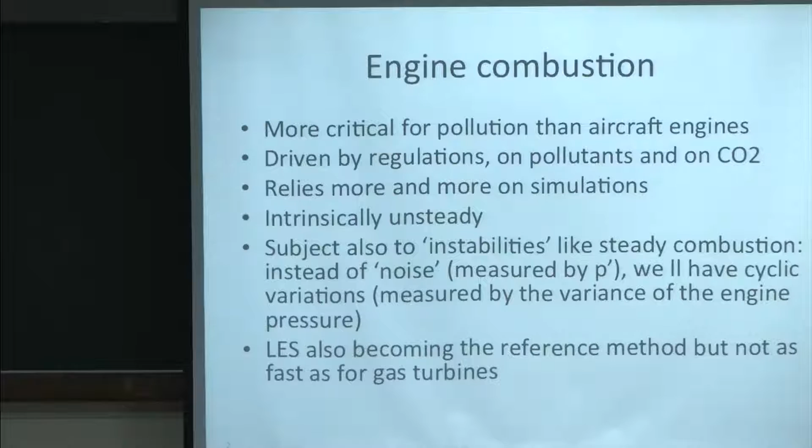Now, in this field for piston engines, LES is becoming also the reference method, but it takes more time than in gas turbines, just because the technical problems of piston engine simulations are more difficult.

So I will focus today on direct injection engines, on instabilities, and I will describe recent LES results to show you how we do these things in France.

Basically, the message here is that if you want to do LES for piston engines, the first thing you need to do is to build a special experiment. You want to validate the LES. To do that, you have to talk to the people doing the experiment and ask them to do the engine you want, because the engines they do cannot be used to validate LES.

So, direct injection engine, that's the general context. You've seen already what that is. Instead of injecting the fuel upstream of the valves here, we inject it directly into the chamber. And that's a great thing to do because you don't have to burn in a fully premix mode. You can save fuel, but at the same time, of course, it raises all kinds of interesting questions.

The idea is to go to lean combustion, and the idea also is to stratify the charge, which leads to a very different type of flames here. So it's good for many things, but it's also bad because you cannot work only with stratified flames, and you also need to be careful because you start making soot, because if it's not premixed, you start having very rich zones which will make soot, and the whole flow field becomes very important.

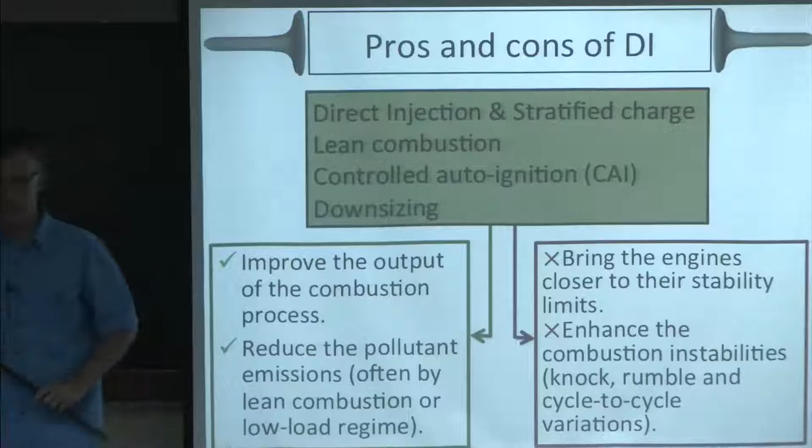I will just show you a picture later, but as you know, among all the unpleasant things which may happen in an engine, where cycles are different, is that one cycle from time to time might start to knock. And if you have knocking in an engine, that's absolutely a bad idea.

So we have seen that steady combustors like gas turbines can exhibit instabilities. It's the same thing for a piston engine. The difference is that in a gas turbine, what we see is that the flow will oscillate in time, and in a piston engine, what we'll see is that cycles will be different.

So, of course, the worst case in an engine is to have a cycle which burns and the next one does not. And I will show you many examples today where this happens. And then, of course, you imagine that if one cycle does not burn, you release all the fuel to the exhaust, and that's not going to help in terms of pollution.

So images of cycle-to-cycle variations, those are, for the moment, experiments. The spark is here. Those are 4 different cycles at the same crank angle, and you see that they are different. This means also that this is the curve we're going to use in most cases here.

This is the pressure curve. In an engine, the pressure curve goes up like this. And if the engine is not fired, it comes back to this. If the engine is fired, you produce work, and that's what you use to push the car. If you plot many cycles on the same thing, you have here the maximum, the most efficient cycle. Here you have the cycle which burns at the minimum level, and all the other cycles are here.

What you do, you compute the work produced by the engine, which is called the IMEP here. And the IMEP, you can take the variance of this quantity, which measures the spreading of this curve. This is what we'll measure to define what an engine is in terms of stability. So if this thing is less than 2%, that means really the integral of this curve.

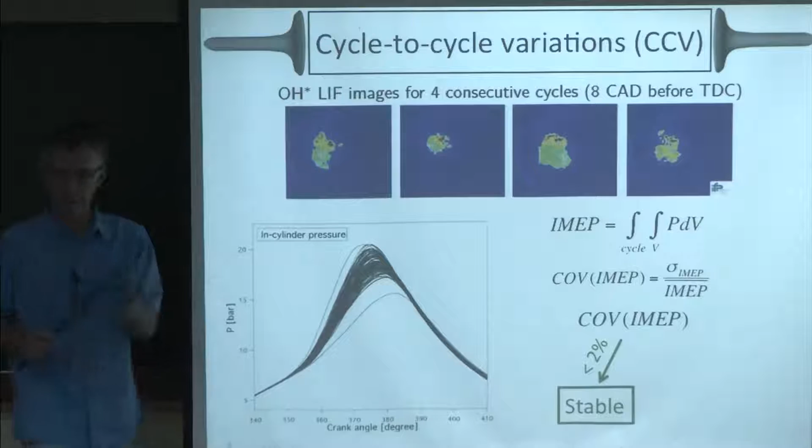If it's less than 2%, you say your engine is stable. And if you have typically more than 2%, you say the engine is unstable. So the engine that you have in your car today has probably a limited level of CCV, less than 2%. Otherwise, you would not find it on the market, because when an engine is unstable, it's very difficult actually to drive it.

It becomes a problem. And that's why actually many good concepts of engines do not make it on the road, because they are too unstable. It's exactly like gas turbines. You have a great gas turbine, but it's oscillating. You cannot do anything with it.

Another image of an experiment showing also that certain cycles might be burning very fast while other cycles are not. Even the things you see, and I'll come back to that today many times, you see that what happens quite often is that these flames get split. When turbulence is intense, there is no reason for the flame front to remain one ball of flame. Quite often it becomes 2 balls or more. And when it does, each ball now is more sensitive to stretch and may actually quench. That's what's going to lead to problems of variations.

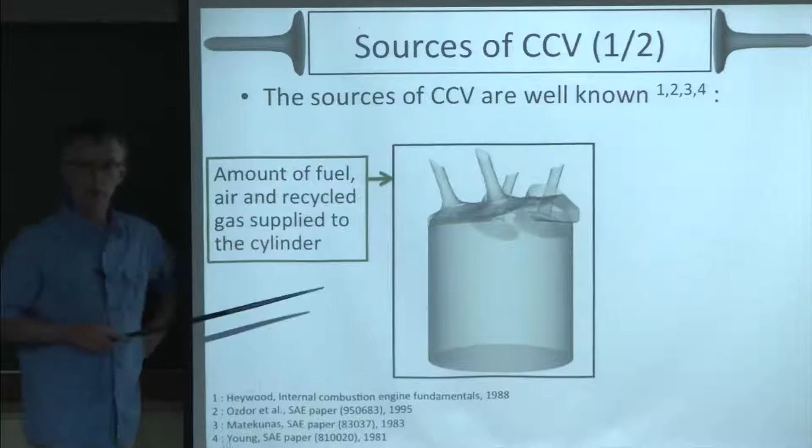This is a turbulent flow. Turbulent flows are chaotic, so maybe for one cycle you have a certain structure, and for the next one you have another structure. And then you can have, at the spark plug itself, which is of course the sensitive point here, you can have a different composition. And if you have a different composition, then of course when you spark it, well, you have a different flame.

There's a last but not negligible problem here, is that the spark itself may not be a process which is fully repetitive. You have to load the electrical circuit, then you get the spark, and from cycle to cycle, this thing may be different. We won't talk about that here because for the experiment, like as for the simulation, we used plugs which were really repetitive.

Now, what causes cycle-to-cycle variations? If you have a stable engine, you want to make it unstable, there are different ways to do that. One of the methods is, for example, to increase the level of recirculating gases that you inject in the engine. So if you start from 0, you have a stable engine with a 2% variation, and then you increase the dilution here by burnt gases in the fresh gas. Then at some point, these things go up, depending on the engine, but that really tells you that here, at 20%, you cannot operate this engine, okay?

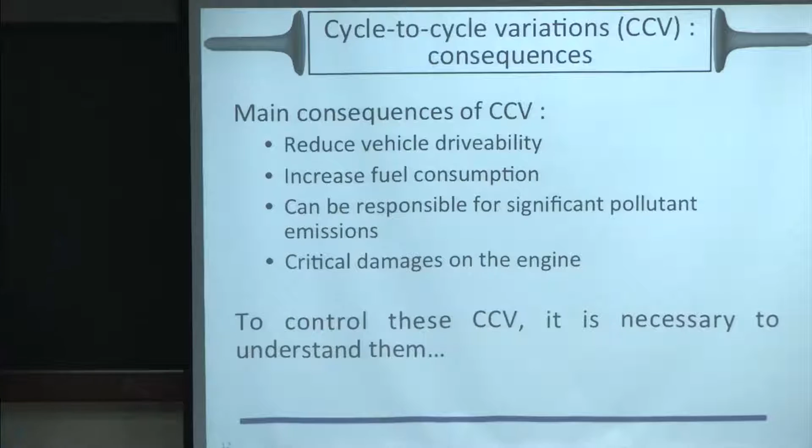To suppress them, you may try to suppress them blindly, or you may try to understand them, which for us, for our community, is of course the best way. For engineers, sometimes if you can fix a problem and make money out of it, it's sufficient. But for scientists, it's not.

So how do you study CCV? Well, we're going to use an experiment which was developed specifically for LES in Paris here at IFP. And we're going to use simulations.

Now in terms of simulation, I don't need to convince you we are not going to do RANS, because RANS cannot do something else than the mean. We are not looking for the mean, we're looking for the perturbations. Even so, certain people like Converge are trying to convince everyone that they can do CCV with RANS. By definition of RANS, it cannot do CCV. It's going to give you the average cycle, that's all.

DNS, of course, you're not going to do that in an engine, so we are left with LES, not much to do. Just a comment here, what we saw during this big project, which lasted 4 years...

The main problem is to make sure that the guys doing the experiment give you the data you want and actually operate the engine that you believe you are operating. In my group, there's a big joke that I've been using all the time. I keep saying if we do 100 simulations, out of these 100, 90 are not computed on the right geometry. And for the 10 which are left, 9 are not computed with the right flow rate.

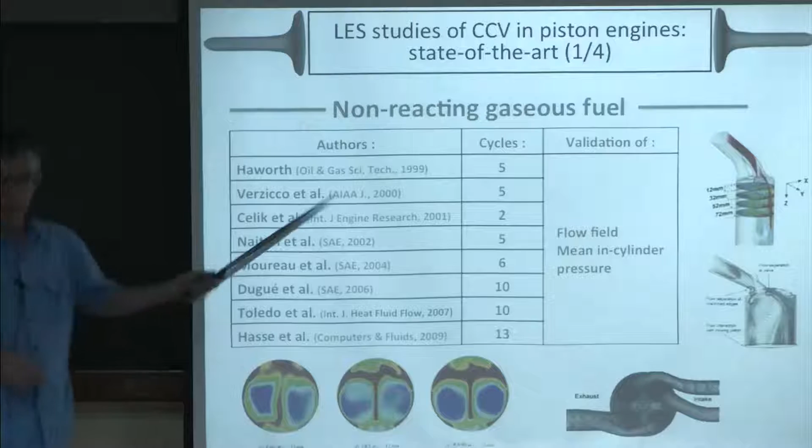So that's for the non-reacting cases. Of course, when you go to reacting cases, in the literature, it's going to be even more limited. That's with two-phase flow, non-reacting, and that's for reacting flows. In the field of reacting flows, when we started this work, there were only ones done on 10 consecutive cycles, because if you want to do that, you must compute the whole cycle: intake, compression, combustion, exhaust. So even that, even in RANS, can be an interesting exercise.

So there's only a few works then which deal with CCV. And in most of these studies, the idea was just to prove that you could do it, but there was no real validation. This is why we started this project, because we wanted to compare with an experiment.

So the experiment was built to do that. It's not as if we take an engine and try to see what it gives, we chose the system. So this is the engine. And the first thing you have to do is make sure that you understand the boundary conditions.

So we forced those guys to remove everything they had, and we told them, we want a plenum here where we know what the pressure is. We want a plenum here at the outlet where we know what the pressure is. We want to know exactly all the geometry here, and we don't want anything fancy. We don't want a filter. We want to know exactly the whole geometry, and we want it premixed.

That was the other point also. Before doing the direct injection, the first exercise was to say, let's make it premixed. So in that case, there is no mixing question. Can we do it? Can you capture what's going on?

As I said this morning, if you do it premixed, we are mixing here the air and the propane, so the whole thing is premixed. So you need to put a flame arrestor, otherwise the experimentalist might hate you. Which means also that we're going to put the flame arrestor in the simulation, so we need to model it. Otherwise, we could not capture what's going on for acoustics, for example.

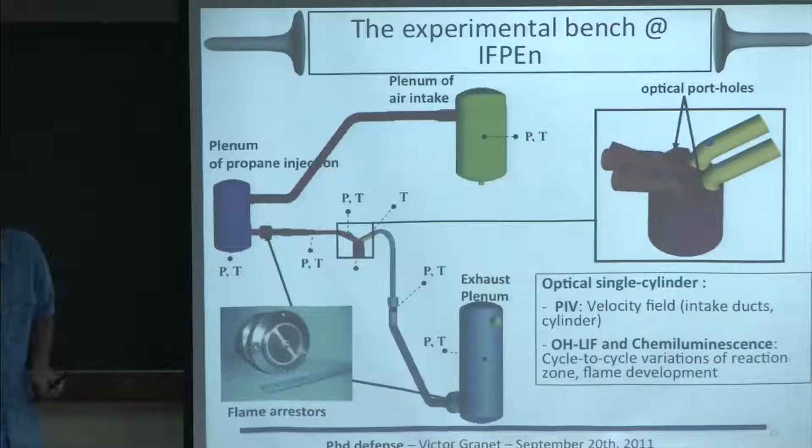Now it's a nice setup because we do have all boundary conditions. So you recognize here the flame arrestor. That's the inlet plenum, that's the outlet plenum, that's the engine. And this is what you need to compute, okay?

So you see here the intake. You recognize it's LES now because you have your eyes adjusted to what I tried to tell you. If it's LES, you must see structures. Now you see structures, okay? If you do the same thing with RANS, it will all be smooth. Next cycle, etc.

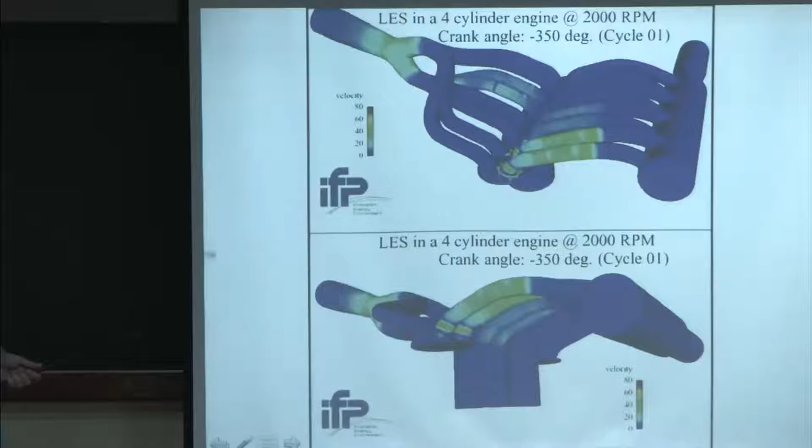Remember that this is not a real engine yet. For example, it's a single cylinder. And of course, we could compute a 4-cylinder. If you want to do a 4-cylinder, you're not going to validate much, because the experimental data will be insufficient. So it's really a problem to find the right equilibrium between a realistic engine and an engine on which you can do good measurements. So we stick to this single cylinder.

So you have an optical window here. This has been described yesterday by Professor Garwal. You have a transparent piston. You can look at the flow from the bottom, and you can do all kinds of diagnostics. Those are the dimensions. This is a 500 cc, I guess, displacement engine.

So I'm going to talk about... there's a huge database which was created for that, but I'm going to talk only about 4 cases. The first one is what we call the motored engine. That means the engine is not fueled. It's just rotating because of an electrical engine. And you can look at the non-reacting flow.

And the rotation will be 1200. And of course, there's no instability there, there's no combustion. Then we'll talk about the reference case. The reference case is what we call stable ref, which means it has a low level of CCV. That will be used as a reference.

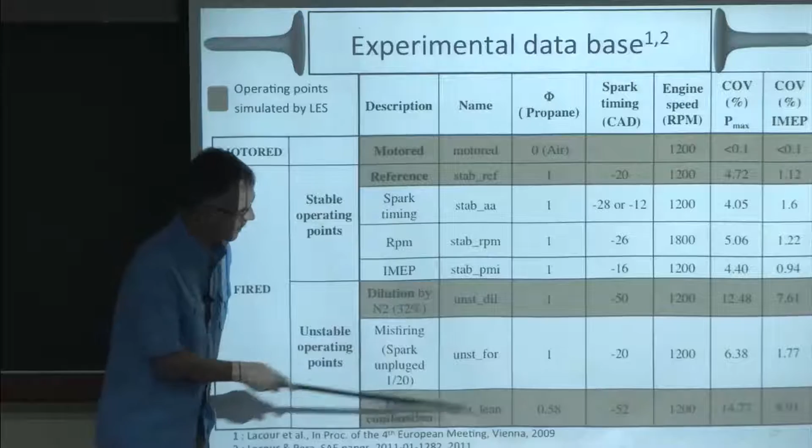And then we'll do a case where we dilute the intake gases by nitrogen. And here, you see that the CCV goes to 8%. So that's an unstable case. And then the last case we'll do is called unstable lean. We'll decrease the equivalence ratio from 1 to 0.58. And then, of course, we'll go to 9% cycle-to-cycle variations.

And the fuel will be propane, so again no problems with atomization. We are not going to be able... it's not an atomization problem because there is no atomization. It's not a problem of mixing because we do premixed. So we limit the number of things which can cause cycle-to-cycle variations.

So let me show you first the setup. I will show then the simulations and go later to the analysis of these things. So LES strategy, you've seen that the objective is really to see what's going on here. But if you want to see what is going on here, you need to compute the whole thing down to a point where you know the boundary conditions.

So that will be this zone here. And of course, we could compute only on a small part of the engine. That would be easier. But then the boundary condition will be very difficult. So when we do the whole thing, for boundary condition, it's clear: we go to a place where pressure is imposed. Pressure is imposed, simple.

The problem, of course, is that you need to model everything, and you need to add the flame arresters because they are there. So initially, we didn't put them in, and we saw that that was not working. The code is always the same—it's the same code we use for gas turbines.

It's just that it can handle moving mesh. That's the only difference. Just a comment about piston engine codes: they are a little bit different from gas turbines because when we compute one cycle, we basically interpolate between phases.

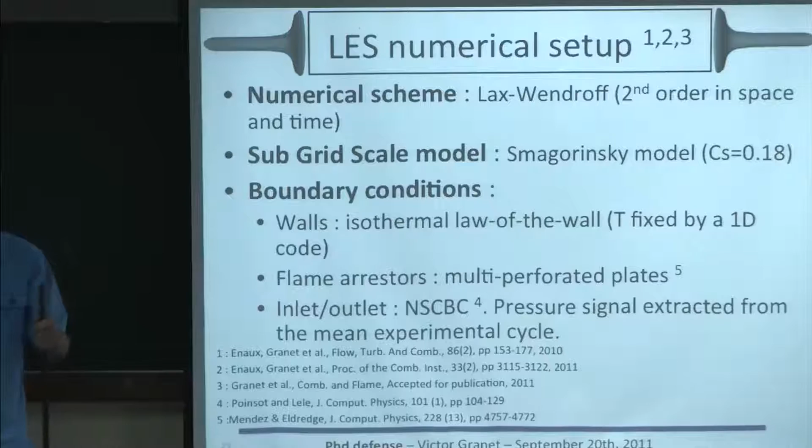This is the good thing about teaching for 30 hours. Now you should know most of the things I'm referring to.

So this is the mesh. The first thing you do in this system is to do what we call a mesh-only run, just to visualize the mesh and see how it's moving.

So the mesh is actually deforming, and as I said, maybe you can see it, though I'm not sure you have the resolution to see it from where you are. The mesh is changing from time to time. You can see small jumps. This is every time we have an interpolation, then the mesh changes a little bit, and there are about 40 moments in one cycle where we change the mesh.

One of the big problems, of course, is how you handle the opening and closing moments of those valves. When you open some of these valves, normally you have a shock because the pressure ratio is more than 2, so you get a small shock over 2 or 3 points. So there are dirty details here that most companies won't tell you, but you have to do things which are not especially nice to have the code handle.

There's a new thing also compared to gas turbines: now at every cycle you need to ignite. You smear it out, saying it's not going to last long, so I just put artificial viscosity and I wait until the pressure goes down.

Yeah, approximately constant.

Well, we add points, okay? That's the interest of interpolation. When we go to bottom dead center, then we have much more points than at top dead center, because as I said, 40 times per cycle we change the grid. We stop the computation, we take the result, and we go to a new mesh. We do that 40 times per cycle, yeah.

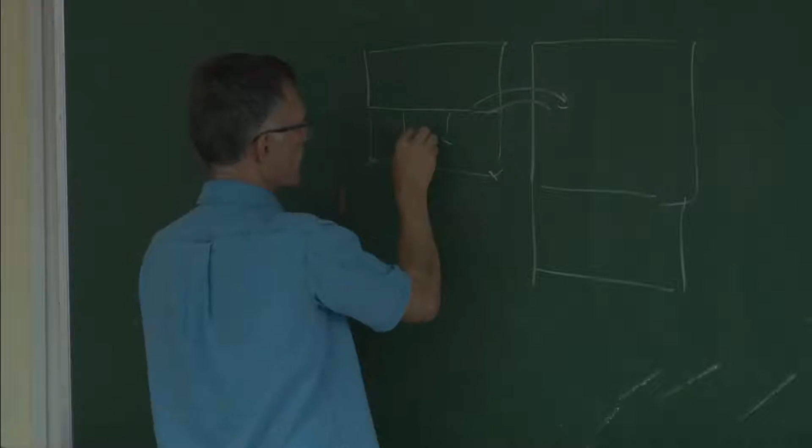So you create all the meshes: the initial mesh and the final mesh every time. And then you interpolate, you stretch the mesh in between. The whole procedure used to take about 5 months.

Yeah, well, the new mesh is always cleaner. After you pull it a little bit, it gets less clean, and that's when you decide to change. Every time a mesh gets a little bit too distorted.

The remeshing is automatic, that's not a problem. We do a high order interpolation. That works well.

Well, we use exactly the same thing, IFP has a RANS code. This is the same procedure they use for the RANS code. There's no difference.

So you said the pressure signal is averaged and imposed at the inlet. Usually in combustion engines, the intake manifold pressure itself varies very drastically, which can cause many changes. Sure, the intake pressure here fluctuates, but we compute the plenum up to this point, and at this point the pressure doesn't change. It's the same for the outlet. That's why we wanted these big plenums. Otherwise, if you only did it here, the intake pressure would be fluctuating, which is painful.

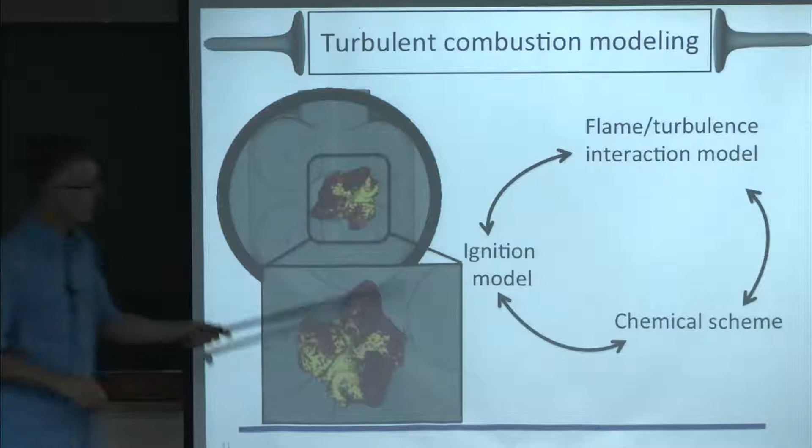The additional problem here compared to a gas turbine is that we need to ignite at every cycle. In a gas turbine, you ignite, then forget the initial conditions, so you don't really care about the details of the ignition. In a piston engine, you have to care because it's going to play a big role. The other thing which is different is the chemical scheme - for gas turbines we didn't have to worry about that. For this problem, things are a little bit more complicated.

So spark ignition, I will talk about it tomorrow - it's extremely complicated. Describing the initial plasma phase and all that is a very tough job. So for a problem like this, what most people do is neglect the plasma phase and say, okay, we can have 40,000 K for a few nanoseconds. I begin after that. What's important for me for the flame is that this thing is releasing a given amount of energy over a certain amount of time.

Why is it not important for a gas turbine to see how the spark propagates? Well, in a gas turbine, if you're looking at steady state, you don't care how it was ignited, because you ignite it only once - you could use anything to ignite it. Here you ignite it at every cycle, so if you have a wrong ignition procedure, it's going to contaminate the whole simulation. Now, of course, some people in the gas turbine community are specialists of ignition, and they have the same problem - they have to model the igniter.

So what we do here is use a model called the ED model, which was published a few years ago. The ED model basically gives you a Gaussian in space and time, an energy deposition at time t0 over a sphere of radius sigma r. The total energy deposited is epsilon I. So if you know the energy, this produces an energy deposition in the equations that increases the temperature, and then the combustion model takes over. Which is, of course, not what a spark is actually doing, but I will talk about it tomorrow - it's a different topic.

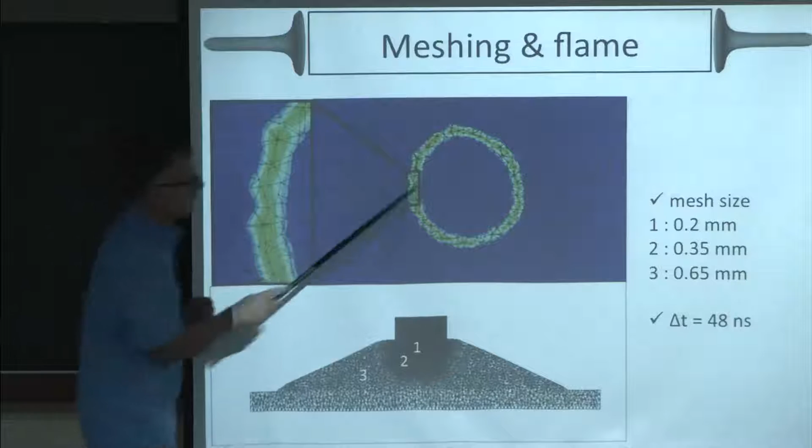So the spark in this engine is located here, and we refine the mesh in this zone, because that's where the gradients will be very strong. This is a zoom on that zone. You can see the flame is resolved over 1, 2, 3 points, which is really the minimum you can have - below that would be difficult. This is where we deposit the energy, and after a while you see this kind of flame starting and getting wrinkled.

So this is a pragmatic approach. It does not take into account the physics of the plasma, and we cannot predict cycle-to-cycle variations due to the plasma phase - obviously this is not in our capacities. It also does not take into account the fact that the electrical circuit itself might not be perfectly repeatable.

Now, chemistry. I said in the gas turbines part that the nice thing about chemistry in a gas turbine is that it's at one pressure, one inlet temperature, and one equivalence ratio. Now everything is changing in an engine. The pressure will go up, the temperature will go up, but still you can use a simple scheme.

We use a two-step scheme for propane because we were burning propane, and that's the equilibrium to get the right flame temperature. With these two schemes, if you fit the Arrhenius laws, you can obtain something which works all over the range that you need. So the cost, of course, is going to be much less, and that's important for us.

So let me show you the typical results. A good way to look at an engine like this for chemistry is to plot the temperature or the pressure, because the two go together. Typically in an engine, when you compress the gases, it's an isentropic compression, so temperature and pressure go together. The important thing is to be able to match flame speed over a range of fresh gases temperature, or equivalently over a range of fresh gases pressure.

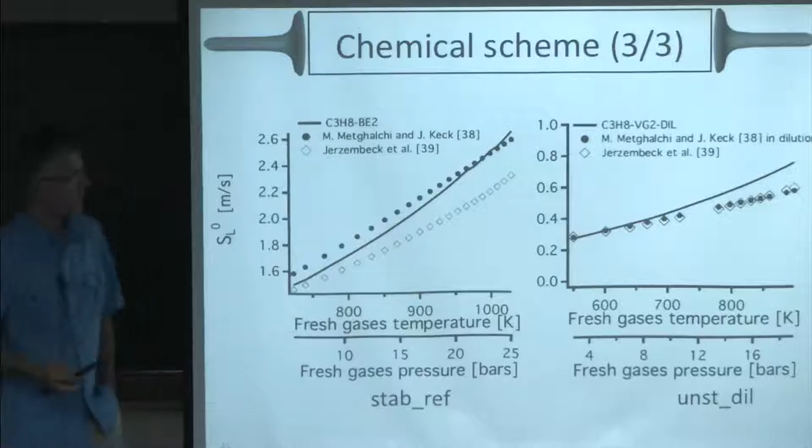You go here, from 700, 600 to 1000, and here you have the two-step scheme which we used, and here you have two complex chemistry schemes. Interestingly, as I told you before, they don't agree. So even if you wanted to take a complex chemical scheme, you wouldn't know which one to take. So we fitted to be in the middle. The difference, of course, is that this costs 1 and this costs 50.

Same thing here for the case where we have dilution. This is a case where we have EGR in the fresh gases. Again, you see that the two-step scheme, which is the same as before, is doing reasonably well until here there's a mismatch. But I think that's not the main problem we have in the simulation.

For combustion modeling, we use the same model that you know, the thickened flame model. We don't change the constants. So let me jump now to the results.

This is the motor case where you have no combustion. You can see the sensors here: sensor 1, which is here, sensor 2, which is in the intake here, and sensor 3, which is in the plenum. You can see the turbulent flow.

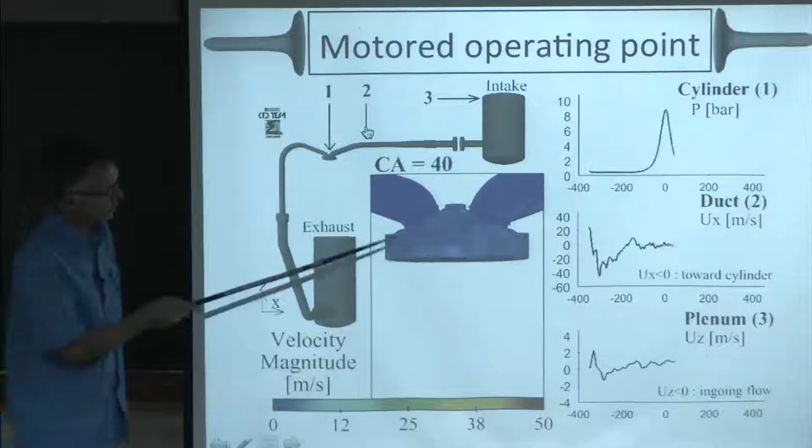Now, the trick is, the problem here is that you can do this simulation, and then what do you do with them? Well, you have to compare them to the experiment. What do we have to compare? I'll show you in a minute that we can compare all the pressure signals all over the lines here to see if we capture them, and we can compare the velocity field inside the engine. So that's for a case without combustion.

When you do combustion, I'll show you here first an example just to give you an idea of the flow. This is a case with a high CCV, this is a case with a low CCV. When you just look at one cycle, it's difficult sometimes to see if it's low or high because you would have to compare the cycles. But you will see a few things here.

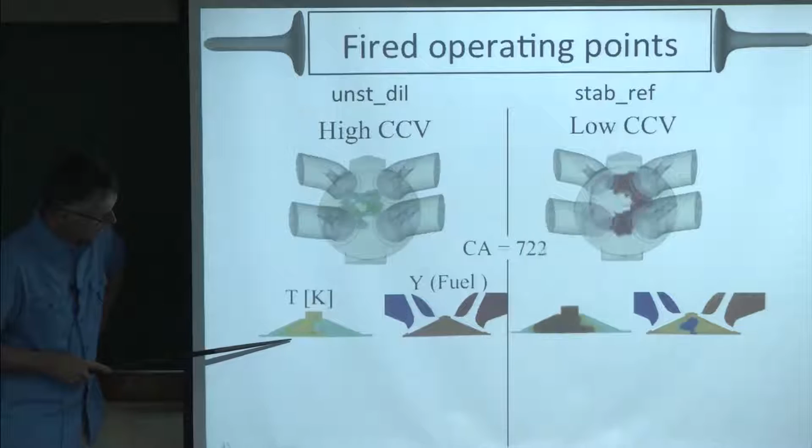The first thing you will see is that we spark sooner in the high CCV case and later here in the low CCV. Then when you get combustion here, the flame really starts as a big flame right away and hot, while here you see from time to time these two flames. Then you see much more wrinkling here; here, the wrinkling is much less. The flame is more compact, less sensitive to turbulence.

That explains when you repeat these cycles: here you see many cycles one after each other. Here, in many cases, you see a flame which is shredded into many pieces. And here you have a very robust flame, very spherical.

Just a word about time steps for these simulations, for the reacting case. You have here the time steps in nanoseconds. The time step can go to values like 50 nanoseconds—it's small. This is why these simulations are expensive. And the time step is changing, of course, versus time.

There are moments where you can have large time steps, but when you have ignition, for example, you need a small time step. And when you have exhaust, you have very large velocities near the valve, so you need to decrease the time step. How do you dynamically define the time step? Do you initially impose it, or is there a way of calculating it? No, the time step is computed before the time integration by looking at the CFL, the Fourier number, and the chemistry.

And you take the minimum values so that you satisfy all criteria. Now, for the TFLES model, you have here the typical levels for thickening factors and efficiency. You see that the thickening factor, which is the red curve here, can go up to 80 at certain moments. Makes sense, I mean the pressure is very large.

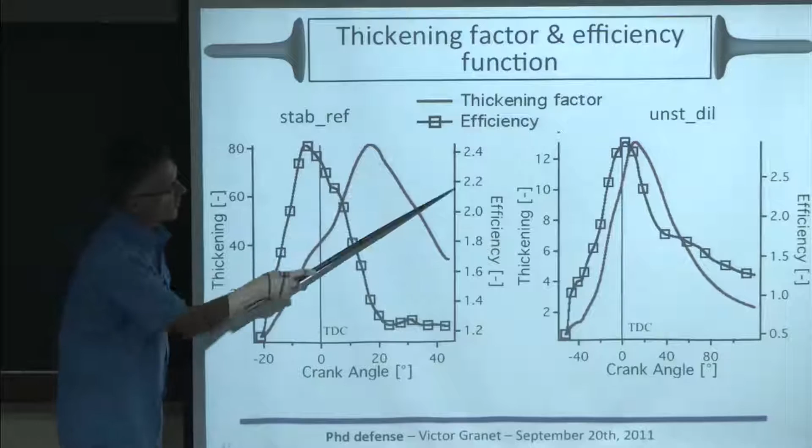The flame, again, we come back to the discussions we've had many times. The flame must be 50 microns thick, so you have to make it thicker, otherwise you cannot resolve the flame front. And the efficiency, the fact that you have thickened the flame, you need to correct for it - that's the mean values. The efficiency is of the order of 2. You need to increase the speed by a factor of 2, which is not big. It's not 50, but still it's not 0 if you don't do that. Again, if you don't thicken, if you take 1 here, and if you don't do anything for the efficiency, you're not going to get the right flame.

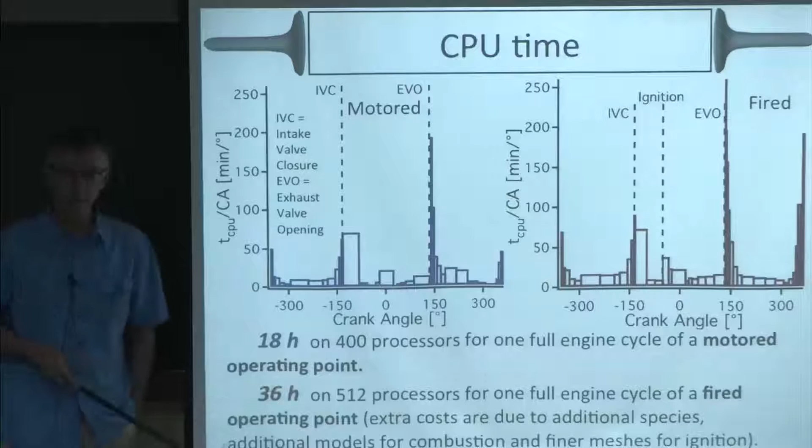These are just orders of magnitude, but this is changing very fast. It takes about 20 hours if you have 400 processors to do one cycle, and about 2 times that to do the reacting case. But those things, if you have more processors, it's going to cost less.

In your simulation, you have taken sensors at 3 different locations. Which component velocity are you using for acoustic - is it the Y component or the Z component? This is pressure. So for pressure, there's only one pressure, it's the wall pressure, it's the static pressure. But what if I have to decompose and obtain the reflection coefficient?

Well, when you do a measurement like this, the simulation does not start here, the simulation starts somewhere here. This is just a result of the experiment. You have a microphone, well, a pressure sensor. You do the same thing in the LES, and you compare. So here, there's no boundary condition or nothing, you just directly get the pressure, you measure the pressure. Do you do LES in the duct also? The conduits? Yeah, LES mesh, LES. The LES goes up to the plenum. We have meshed like 2 more meters here on the intake, and the same thing at the outlet, to go to a place where we know that pressure is controlled, the 2 plenums that we have installed on this system, because we wanted to go to a place where there is no problem with boundary condition.

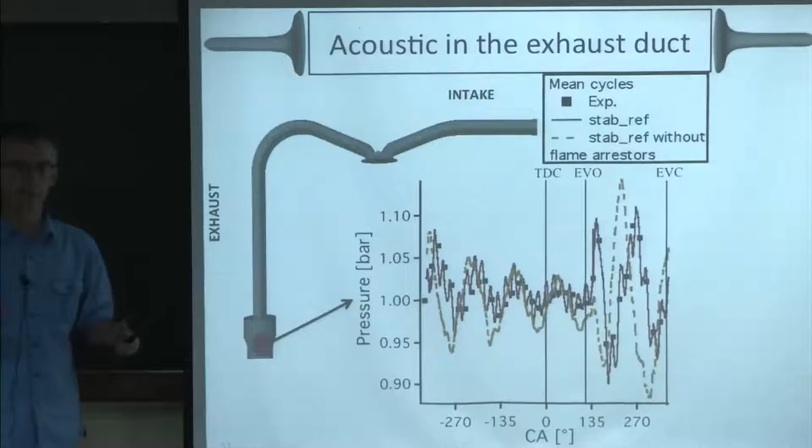Now, the thing I did not mention is that the cycles have very limited variability in the intake and in the exhaust, probably because of the plenums. So we control that pretty well. And still, the pressure in the chamber has large variations. So if you look at the signals in the intake or the exhaust, it's almost the same all the time.

But in the engine, with the LES, you get a very large variation, which tells you right away that you can have—it doesn't mean it's the only source—but you can have CCV even if you have a perfect intake and a perfect exhaust system with no variations. The turbulence itself in the engine can do the job.

Now, of course, when you have the LES running, the question is how do you compare the LES and the experimental cycles? Well, you cannot compare individual cycles—obviously they don't have to match. So you have first to compare the averages, and this is what is done here.

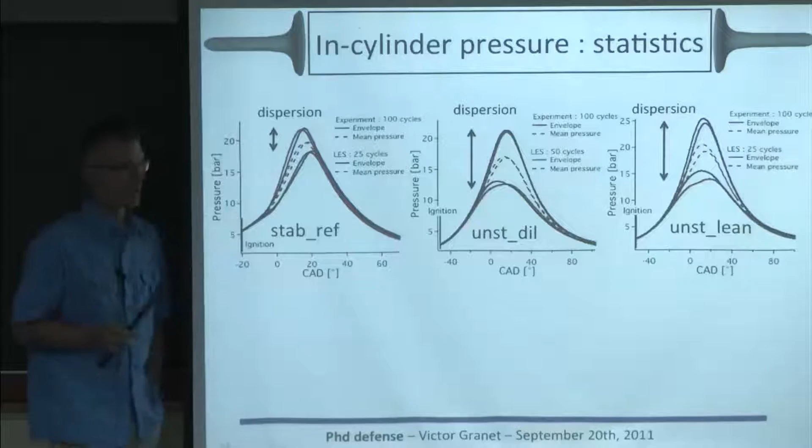So in black here you have the LES, and in red you have the envelope of the experiment. You see that the mean values are pretty good, and that the fluctuations—that means the envelope—are also very well predicted with large eddy simulation, especially here.

For the cases which are unstable, LES also says yes, there is a problem of CCV, and that was actually one of the things we wanted to see: can you predict the fact that these cases will be unstable? The answer is yes, you can.

If you use RANS for that, you will always find only one cycle, so you cannot do that with RANS. Actually, we've tried it—we have a RANS code too. If we run it, we always find the same cycle. There is no reason for that to change, because RANS, again, averages over all cycles.

Okay, let me jump here a little bit, because we're getting a bit late.

Just one point, which is of course very important: once you set up the experiment, you can run thousands of cycles—it's only a matter of the size of the disk on which you store the data. But for LES, each new cycle costs you a lot of CPU. So an interesting question was to know how many cycles do we need to compare.

In many cases I've shown you, we have been comparing 5,000 cycles in the experiment and maybe 10 in the LES. So you can look at, for example, the maximum pressure obtained in the experiment and in the LES. In the experiment you have thousands of cycles; in the LES you have 20, 25, 30.

So there's one thing you can do is ask how many cycles do I need to get meaningful statistics. The least you can have for cycle-to-cycle variation is 2 cycles, it's difficult to do less than that. Then you can have 3, 4, etc.

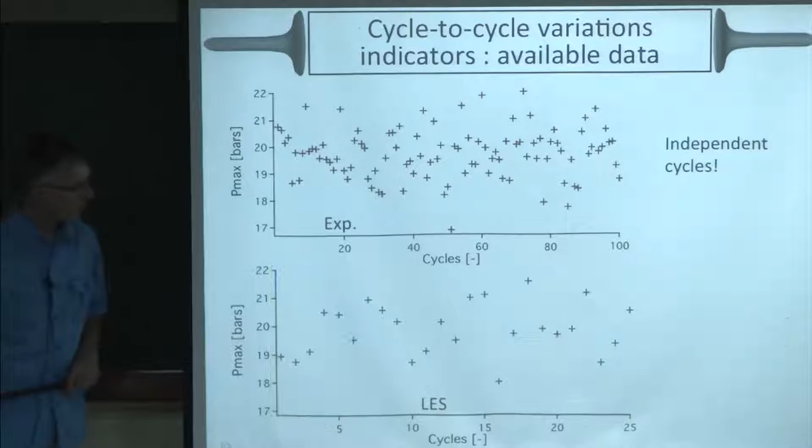What we've done also is start with 25 cycles. So if you do one set of 25 here, you can do it also in the experiment. In the experiment, you can take many sets of 25 cycles and see if the results are the same. And you can actually prove that the results are very close.

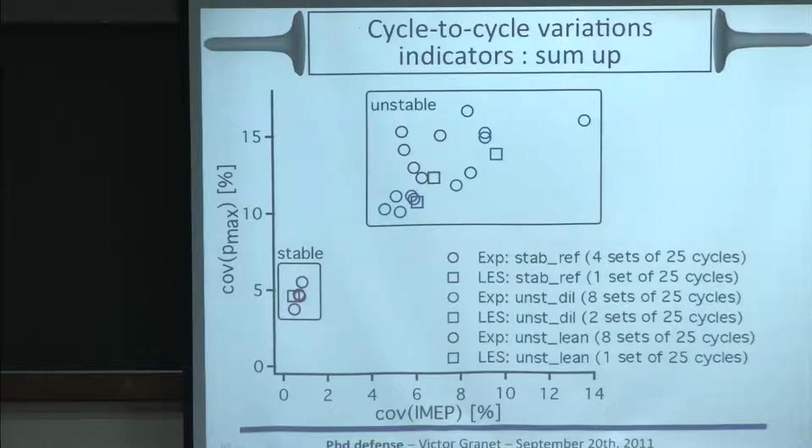This is the result for the covariance of the IMEP, and you see that the stable regimes obtained by LES or by experiments are actually consistent. In other words, if an engine is unstable, you don't need to run 1,000 cycles in the LES to see that. After 25 cycles, the LES will tell you this engine is unstable, it's there, no need to continue the computation. So probably 25 cycles is a good start to do this kind of statistics.

Now another question is why is this engine unstable? To look at that, you can examine the experimental results, where you have chemiluminescence and PLIF, and you can look at the different cycles. That's what we have here.

This is for the reference case, the stable case. If you look at individual cycles, this is what you see: the experiment at the beginning, a little bit later, and that's the LES. Of course you cannot compare them directly. What you can do, however, is compare the average, which gives the probability of finding the flame, and this is what you obtain. It's reasonably the same, but everything is so blurred that it's difficult to conclude.

If you dilute these things, it gets more complicated. This is the experimental results, this is the LES. You see here that two cycles can be extremely different. So when you do averages, basically you end up with conclusions like, well, the flame can be anywhere in the experiment, and the flame can be anywhere in the LES.

It's tough to conclude. So until here, what we've shown is that in this special engine, LES is probably a good way to study cycle-to-cycle variations. The question is, can we use LES to do a little bit more than that? Especially, we'd like to understand the sources of the CCV and fix the problems. We know the sources are not mixing, there's no mixing, they're not two-phase flow, and they're not intake or exhaust characteristics. So they have to be linked to what's taking place in the chamber, so it's turbulence. Let me jump that and go straight to this part here.

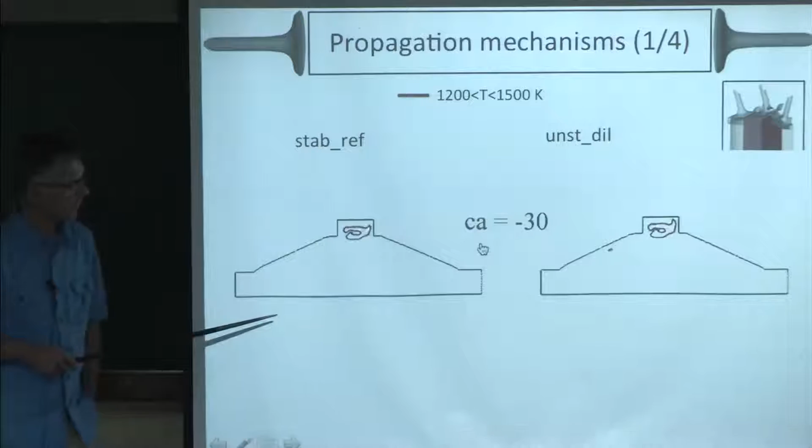Here you have a visualization of the flame contour for two types of flames, the reference case and the diluted flame. We start at a crank angle of -51. You can see the two flames starting. Again, this is the reference case, and this is the unstable case. You have to watch them for a long time before you start seeing differences, but there are differences between these two.

One of the big differences is that this one very often creates fragmented elements of flames. In other words, the flame is not always able to stick together in one piece. Just another example here.

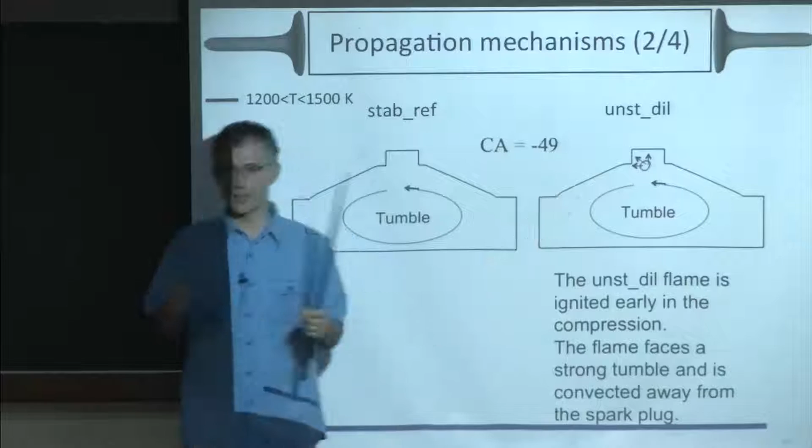Of course, you know that this flow is tumbling, and what we see is that in the unstable dilution case, because it's burning less fast than the other one, we need to ignite it sooner in the cycle. At that moment the tumble is very strong, and basically because the tumble is strong and the flame speed is low, this flame has a hard time resisting the turbulence. That's a good reason for it to, for example, be separated into two pieces, and because it has a low flame speed, it will have a hard time recovering from that.

The other problem in this engine is that the tumble is turning like this, so if you cut a piece of the flame, you push it against the wall. You've seen this morning, if you push a flame against the wall, you quench it. That's not going to help combustion efficiency. And even if you don't quench it, this flame quite often is not going to burn reasonably fast.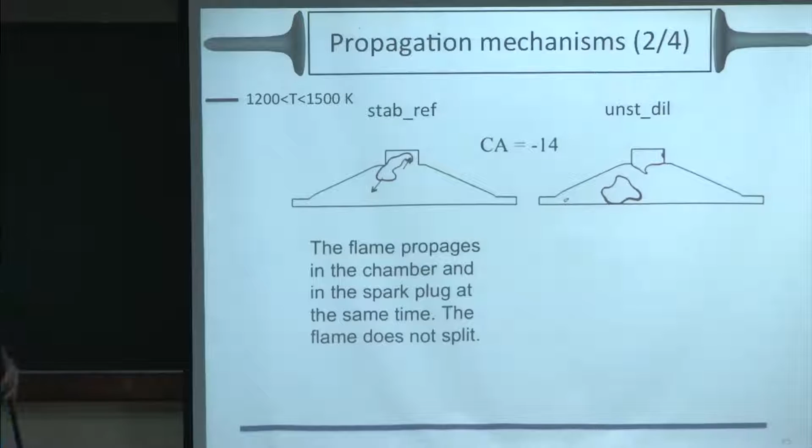Now for the stabilized flame it's a bit different, because here you ignite it later, so the tumble is less, and the flame propagates very fast in the chamber because the flame speed is higher. This is a stoichiometric flame, and the flame usually does not split. It stays in one piece, and then it starts propagating, and it becomes a very strong flame, so it's very difficult for the flow to modify it.

As a result, this one burns almost every cycle in the same way, almost, and this one does not.

The tumble motion is actually an interesting thing here. The tumble motion measurement, like the swirl number, measures the level of tumble in this flow. You see that for the reference case, because we ignite later in the cycle, the tumble is much less than what we do for the diluted case. In other words, for the stable case, the flow is turning more slowly than for the unstable case. And for the unstable case, unfortunately the flame speed is also lower, much less than for the reference case. In other words, we have two things going in the same direction: less flame speed and more turbulence. These two things together are going to affect the flame very strongly.

Was this compared to any motored PIV tumble data? This data, yes, they measured it from PIV. And this makes sense, it's going down because the flow is decaying. The turbulence intensity is going down, the tumble is going down. So that really means the unstable flame here is more sensitive to the large-scale motions, because the flow is turning faster and the flame is going more slowly.

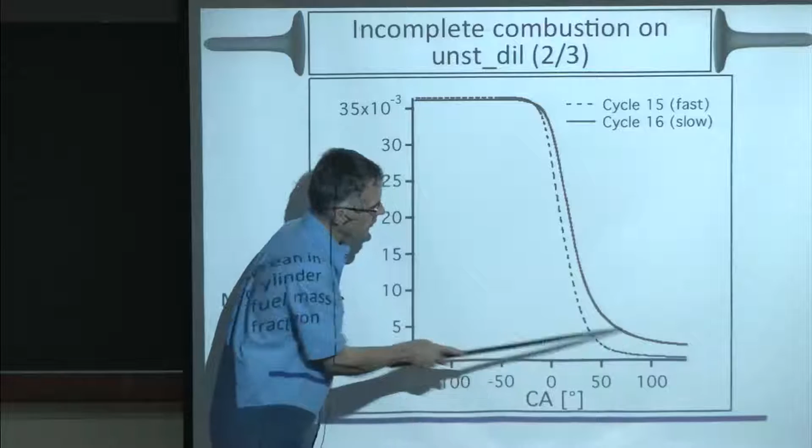So we started looking at this cycle and wondering why it was so. This is a cycle which burns well, and this is a cycle which does not burn well. You see that even at the end of the combustion phase, there is some fuel left in the system, which is not good. If you look now at the movie of the cycle which does not burn well, you see here that one of the problems is it's split into many flame elements, and that's not good for efficiency. So when this cycle finishes, unlike the good one, you have some unburned fuel left near the walls, and that tells you the overall flame speed was not enough.

What about this fuel thing? Like, wherever the fuel is from, will it be like something attached to the wall? So what do you mean? The wall effect on the fuel particle. The fuel particle will be there on the wall and that will be affecting the flame as well.

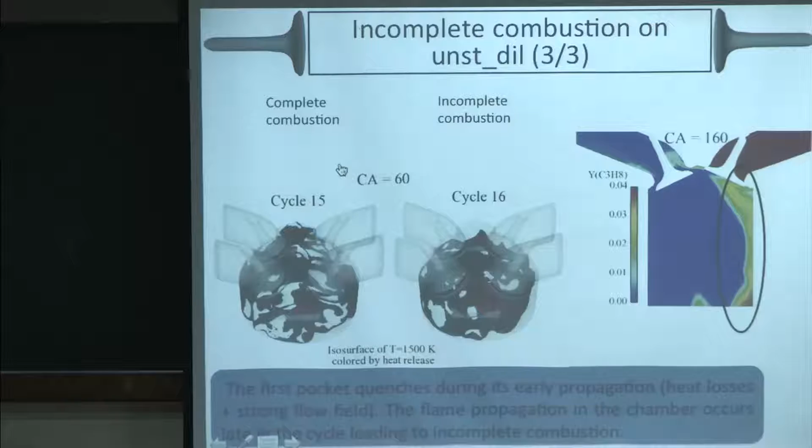Okay, so let me show you now what you can do also in the LES. I don't know if we tried that.

The thing we've seen in this cycle, which is not strong enough, is that it's ignited at a place where it's pushed right away against the wall. So we said, why don't we move the spark a little bit? For example, if we take the initial sparking point, which was here, in the LES it's easy to put it 1 millimeter further down, and then we can repeat the simulation.

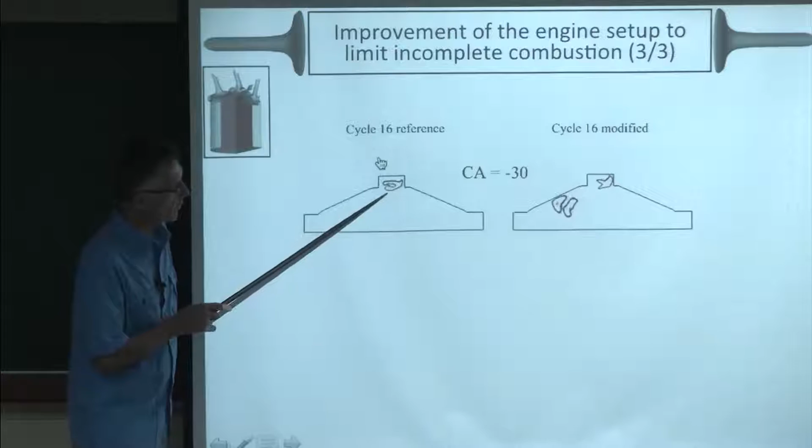And if you look now at the cycles, you see here that you still have the splitting, but the pocket which is here does not quench. This cycle starts burning much faster than that one. The only thing we've done is move the spark a little bit, by 1 millimeter, so that the interaction between the flame, which is pushed against that point, is such that you don't cut the flame and you don't slow it down.

Not enough, at least. If you look at the pressure curves here, you see that just by moving the spark by 1 millimeter, you go from here to there. So it's saying that this flow is extremely sensitive to details, and anything you change here will change the efficiency. It also tells you that when designing an engine like this, you have to think about flame-wall interaction, because this big tumbling motion is a problem. You interact with the wall very strongly.

Okay, I have finished this part. I just want to explain what I'm going to do next. There are also other places where people are trying to investigate chambers which look like piston engines. They're called constant volume combustion chambers, and that's the one I will describe next. Those chambers are interesting because they are almost similar to combustion engines, ICE, but they are not the same. So let me introduce that, and then we'll take a short break.

We touched on this question already with Professor Kouchari, I guess, and you've seen also Professor Agarwal. You know that to propel, for example, a helicopter, the main advantage of using a gas turbine is the ratio of power to weight. It's a light engine, it produces a lot of power.

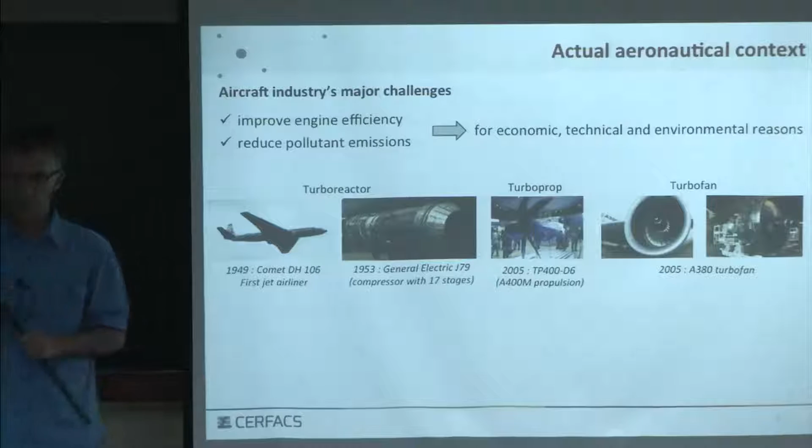So people are looking for better concepts, better ideas to propel aircraft. Among these, of course, using a car engine is a good one, but there are other ways. If you look at the history of flight, as was said yesterday, in 10 years everyone went to the jet engine because the power-to-weight ratio is extremely good. The problem with these engines is they all use the same technology, all based on what we call a constant pressure cycle for combustion. So what does that mean?

If you look at how these engines work, you have an intake, then a compression phase, and when you enter the chamber you are at constant pressure. You go in this way on the diagram, then continue and expand in the turbine, and go back again. That's what we call the thermodynamic cycle of this thing. It's called a Brayton cycle, and it has a given efficiency.

But that's not what you do in a car. In a car, you can go to constant volume combustion. Actually a few groups in the world, in France, Germany, Purdue too, are looking for ways to install this, take this away, install another engine which should have more efficiency.

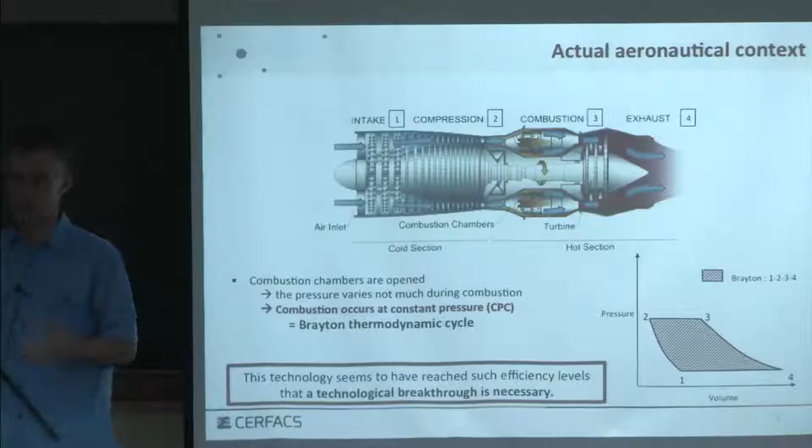To increase the efficiency, we know how to do it in theory. The theory tells you that if you want to increase the efficiency, you have to change combustion. You have to go from constant pressure combustion to constant volume combustion. How do you do that?

When you reach that point, you get out of the compressor. Instead of having this constant combustion, constant pressure combustion chamber, you use a system where you block the inlet, you block the outlet, so now you have a constant volume chamber, and you ignite. Then the pressure will go much higher.

And if the pressure goes much higher, you change cycle, you go to a Humphrey cycle, and this cycle will have more efficiency than the Brayton cycle. You can compute these efficiencies.

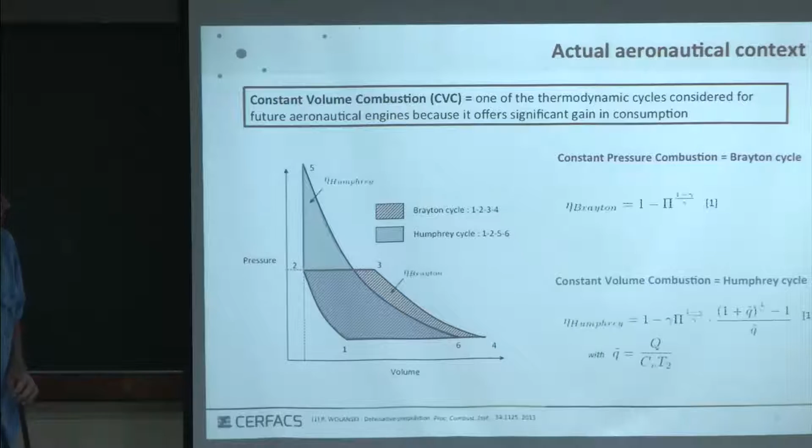That's a classical exercise in thermodynamics. This is the expression of the efficiency for the Brayton cycle, and this is for the Humphrey cycle.

If you put everything on the same plot, you see that for the same compressor, if you go from the existing cycle to the Humphrey cycle, you can go from an efficiency of maybe 40% to 55%, which means the engine of today could have an improvement in efficiency of maybe 25%.

So in the second part of the talk, I'm going to present an engine based on this concept. You will see that it really looks like a piston engine, and it has the same problems, including cycle-to-cycle variations. One more maybe 40 minutes to talk about this engine, which is some kind of hybrid engine sitting in the middle between piston engines and gas turbines.

So once you've said there is a potential gain in cycles from 40 to 55%, everyone starts thinking, well that's great. If you can increase the efficiency of a gas turbine by 15% compared to 40, which would be a third of the present engine, then certainly everyone wants to do it. So the question is, how do you do it? This is where things get complicated.

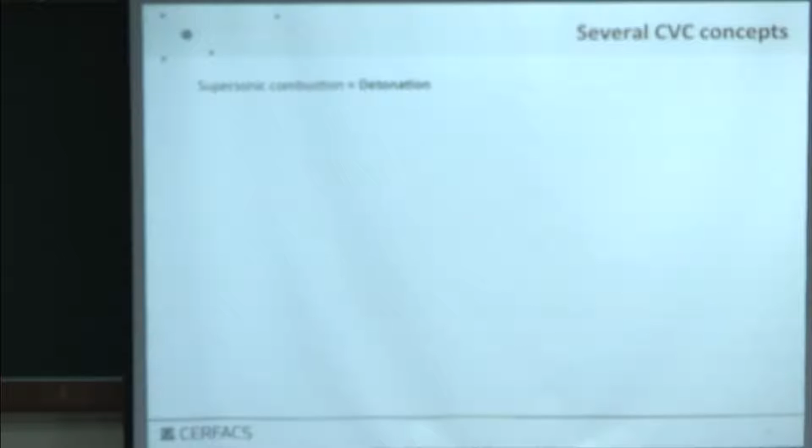There is one way to do that, using supersonic combustion, detonations. I've shown already these pictures where you can have a rotating detonation, and there are all kinds of people looking at that at the moment in the world, trying to use detonation because the combustion is so fast it works exactly like constant volume combustion.

This is not what I want to discuss today. I want to talk about subsonic combustion. Well, there's another one actually, the pulse detonation engine, which is about the same.

You fill a chamber, then you ignite it, you create a detonation, the chamber is emptied, and then you start again. A little bit like the V1 was for the Germans, but with a supersonic flame there, detonation. So that's not what I want to describe today. I want to stick to subsonic combustion.

And then there are different concepts. One of them is what is called the wave rotor, from Purdue. Here it's an interesting engine to have something which is constant volume. You have a combustion chamber which is turning around the axis of the engine.

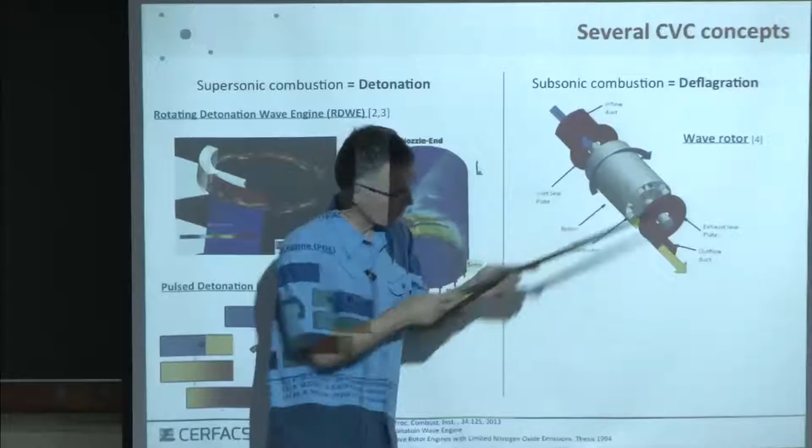So if you are one of these small chambers, you turn — first you arrive in front of the feeding part, so they feed you air. Then you continue turning, they feed you fuel. You continue turning, then they ignite you. You burn, and when you arrive here, they open your exhaust, you leave, and then they reopen the admission, the intake, and you keep doing this, okay. That's why they call it a wave rotor, because this thing is actually turning.

It's one concept to ensure that at the moment where you burn here, both inlet and outlet are closed, because this section here is closed by the outlet flange that you have here. And they have an engine which works like this.

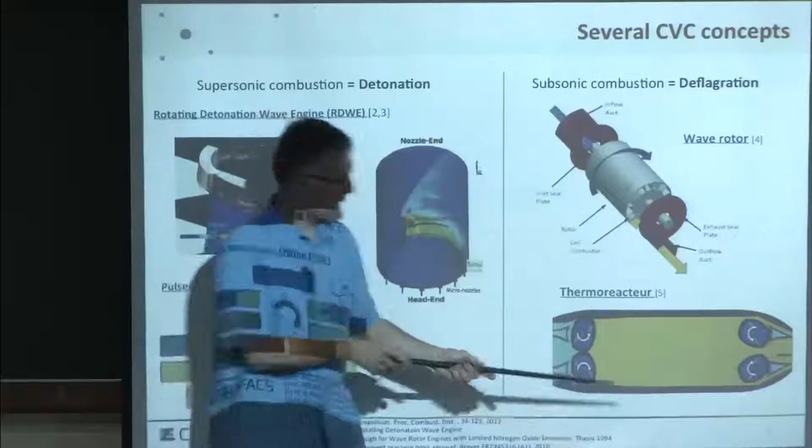And the engine I want to describe today is based on a simpler idea, because we don't want to have this thing turning. We're just going to use a chamber and use valves at the inlet and the outlet. So this is a little bit like a piston engine without a piston. If you would have a piston engine, you could have a piston here going up and down.

And the idea would be to use that in a chamber like a gas turbine. So you would replace these chambers here by these constant volume combustion chambers. Here, we would remove the existing chamber, and here we would put this constant volume combustion chamber. So it's an interesting concept.

There's been quite a few studies in France about it, and I want to show you the results because they are fun, and because again, they bring us back to the problem of CVC.

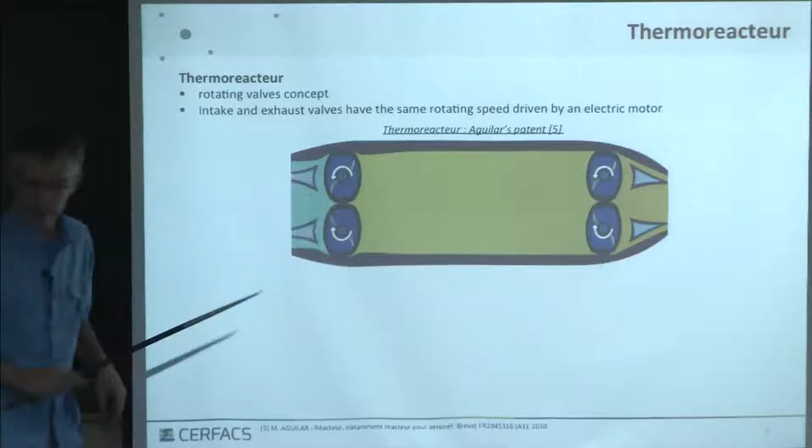So that's a design of the engine. You see the shape here of the valves at the exhaust here and at the inlet here. How does this thing work? So these things are turning. You have fresh gases coming here, exactly like a piston engine. And when they are burnt, they go out through the outlet.

So normally on the paper, it's simple. You feed the system, you close the valve, you burn, you open the exhaust valve, it goes away, and you start again. For those of you used to engines, it actually looks a little bit like a two-stroke engine. You will see it has the same problems.

So if you look at the different phases, you start here by opening the intake and the exhaust valves at the same time so that you can push the burnt gases out and feed fresh gases into the system. Then you close everyone, inlet and outlet, and then you ignite this thing, you have combustion. And when combustion is finished, you open the outlet and you can push these gases out, and then you open the inlet and you purge the whole system. So here you push the burnt gases out, and at this moment you restart.

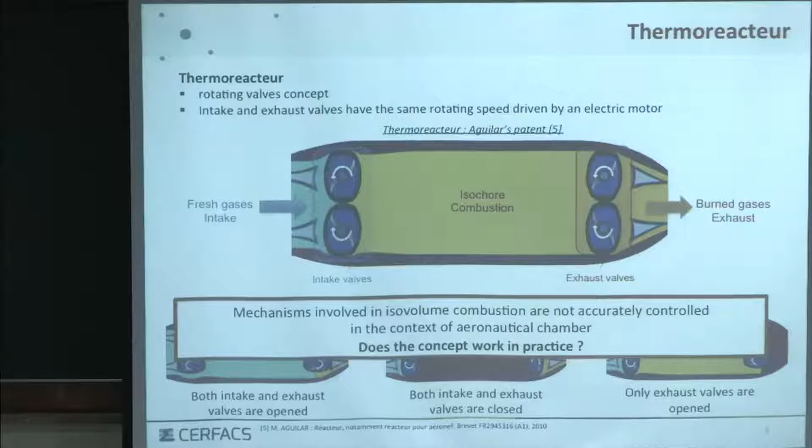So the concept is nice. If you can make it work, you can go to constant volume combustion, so you can go to higher efficiencies. The question is, does it work in practice?

So there's only one way to know that, you need to do the studies. You can do what I will call zero-dimensional simulation, but that's just thermodynamic computation. I won't describe them today. You can do an experiment, which was done here in Poitiers, which I will describe, and you can do an LES. And like always, the question is, is this engine working? And if it works, can we use LES to try to understand what's going on?

So let me first describe the engine. So this is the engine here. You have, again, a plenum, which is working at 3 bars. Then you have a carburation chamber here, which is like a carburetor in an engine, actually.

This is the place where we're going to inject fuel and mix it with the air here. Then you go into a chamber, and in this chamber you can see here the engines which are rotating the valves at the inlet and at the outlet. And then you go through an exhaust duct directly to the atmosphere. So it's a very simple piston engine without a piston.

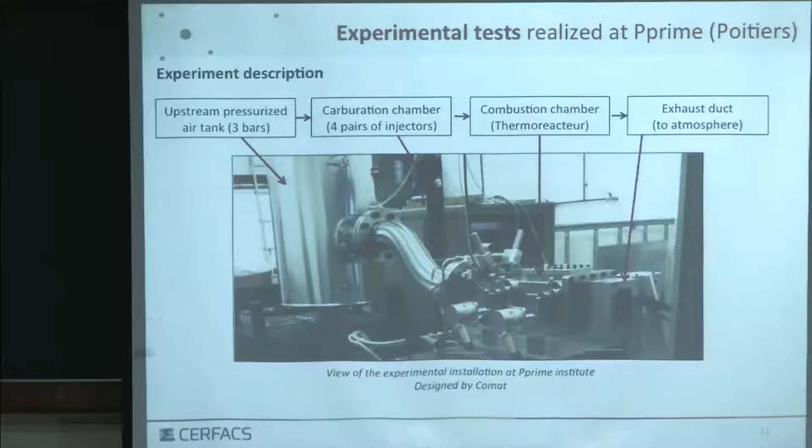So in this system, when the air arrives from the tank here, it's mixed with fuel, which is injected by injectors here, which are on the top and at the bottom. There are 4 of them. They will inject liquid fuel. It will mix with the air and go this way into the chamber where the combustion will take place.

And here, combustion is ignited by a spark, okay, a big spark. And then the exhaust is here. The shape of the intake valves and the exhaust valves was done to give certain pressure profiles, and you can see the intake here and the exhaust here.

For those of you who work on the Wankel engine, this is the same problem as the Wankel engine. The leaks here are a big problem. These systems don't close very well, so we expect that leaks are going to play some role in this system.

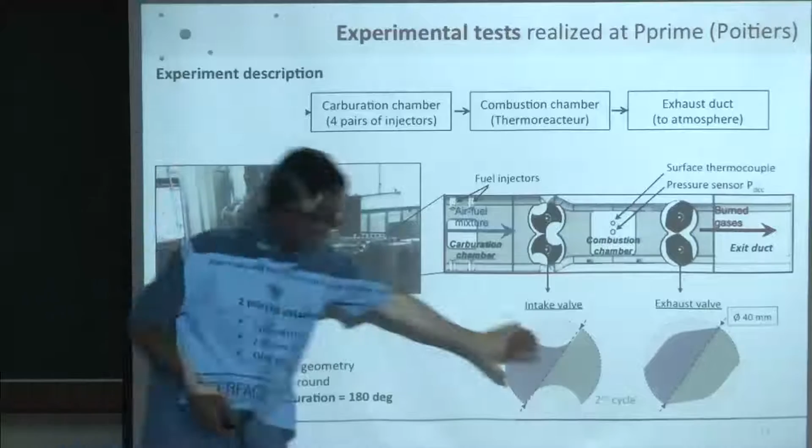The exhaust valve is here, and you see that combustion is taking place at a moment where all valves are closed. This is the constant volume that we need. So it works like this: here we exhaust the burnt gases of the previous cycle, here we intake the new fresh gases, and at the same time we keep pushing burnt gases out, and then everything's closed and we burn.

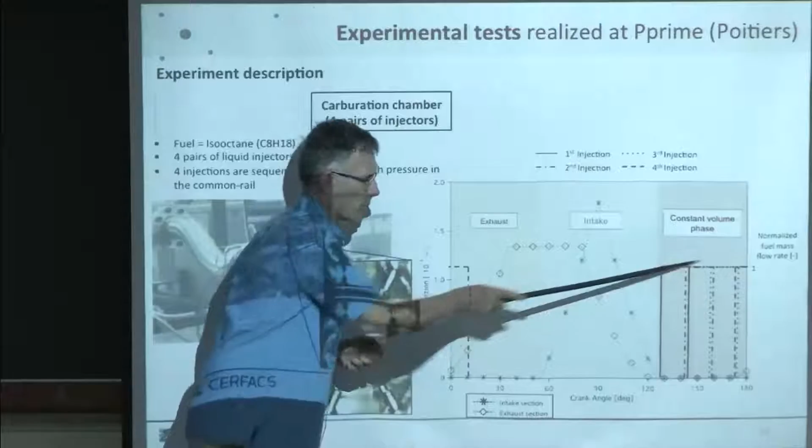You inject while the previous cycle is actually burning. This is the combustion phase of cycle N-1, and this is the fuel injected for cycle N, which will then be admitted here and will burn in the next cycle. So it's a little bit crowded here, you have to do everything in a short time.

The first thing which happened when they started doing that is that they saw they had a lot of problems. After they fixed the first problems, they basically changed a few things: the phase between the valves, the ignition angle. So the phase, I need to define this.

The phase between the valves is the difference of angle between this point and that point, that's the center of the opening of the exhaust valves and the center of the intake valves. That's what's actually used to trigger the 2 valves and the electronic control of these. They did different rotation speeds, 1200 and 1500. They changed the ignition, they changed the spark intensity. So we're going to work mainly on these 2 cases here because those are the ones we computed.

I'm going to show you non-reactive cases, and then I will show you reactive cases.

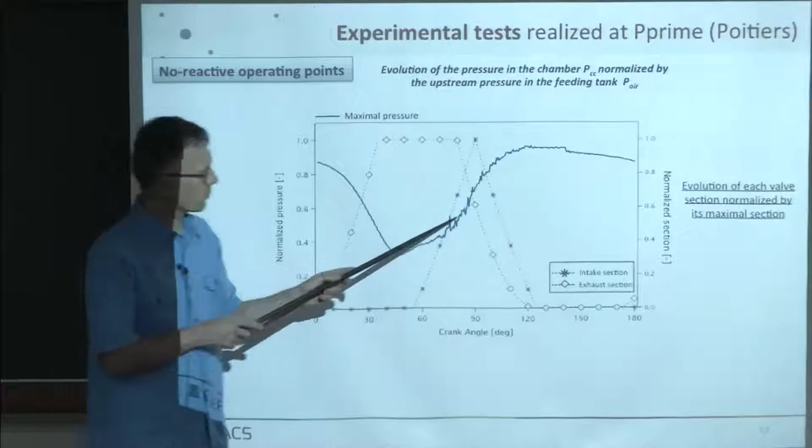If you look at the pressure now, remember this is the intake, this is the exhaust. This is what you find experimentally. Everything is normalized here by the intake pressure, which is 3 bars. So what you see is that when you open the outlet valve, the pressure in the chamber is about 2.7 bars. Since the outlet is at 1 bar, the pressure goes down. Then when you open the intake valve, there's more mass coming into the problem. Then you stop injecting here, you close all the valves, and the pressure goes down slowly, and then you restart your cycle. There's no combustion here.

You see something here that's a technology problem: this curve is slowly going down, even though the inlet valves and the outlet valves are closed.

So that's telling you you have leaks. That's really a major problem in all these systems: if you have something turning, like in the Wankel engine, being able to avoid leaks is a tough problem. It's not our problem, but it's a technology problem.

If you do multiple cycles for this flow, you find the maximum pressure, the minimum, and the mean, and you see there's very little dispersion or variation, so it's almost always the same. It's a repetitive process. It's not going to be like this with combustion, but without combustion, it's a very steady process.

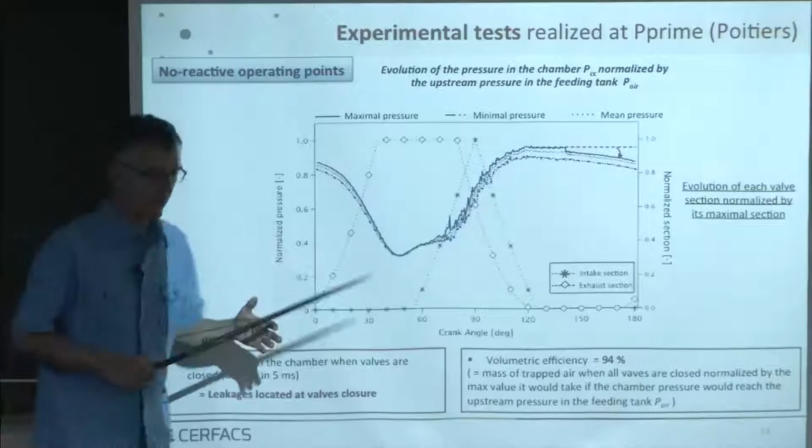So we know where it's leaking. It's leaking, of course, near the valves, and there's not much you can do about that. But the volumetric efficiency is of the order of 94%. The volumetric efficiency is the ratio of the trapped mass you have at one moment, compared to the trapped mass you would have if you waited forever so this thing fills up. So it's not too bad—94% is a reasonable number for such a new chamber.

Now, this is the case with combustion. And with combustion, things are different. We ignite here just at the moment where both valves are closed. And when you do that, this is one pressure cycle.

It's always normalized by the inlet pressure. So you go from 3 bars here, and then typically up to 13 bars. If you do a simple computation of final pressure, you see that 12 bars is not enough—for this case, we should have gone to 17 or 18. This is due again to leaks and to combustion that is not sufficiently fast.

So if you do another cycle experimentally, this is what you get. Another one. And you see these cycles start showing something we've seen before. I'm showing here 50 cycles. What we've seen for an engine is that you have a lot of cycle-to-cycle variations, especially in the combustion phase. Even so, at this point, when you ignite, the pressure is the same.

That's an interesting problem: the pressure is the same, the equivalence ratio is the same, yet suddenly certain cycles will burn very fast, and certain cycles will almost not burn. So we again hit this problem of cycle-to-cycle variations.

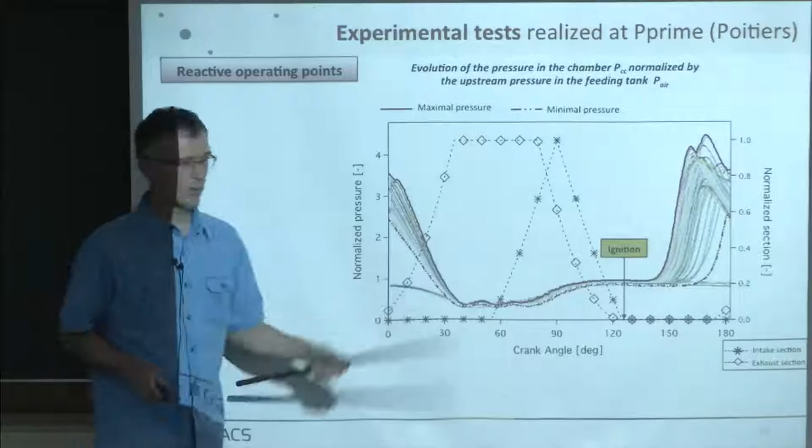That's the maximum pressure in the system, and that's the minimum pressure in the system, and we'll use that for LES to see where we are compared to the experimental data. So let me skip that for the moment.

The important question was, why do you have these cyclic variations, and can you limit them? And why don't we actually reach the maximum pressure? We should have gone to 17 bars. If you only go to 12 instead of 17, the efficiency will not be good.

The chamber is enclosed—how is it ensured that the heat transfer happens? That's the other thing which leads to lower pressures: the heat transfer to the walls. That's one other reason why the maximum pressure does not reach what it should be.

You have a question?

Yeah, there's a backflow. Not only a backflow, but if you're not careful, the flame does that too—you can have a flashback. You don't see it here, but you'll see it on the movie. You can certainly have a backflow. Well, this is the people in the gas turbines—they are beginners in the field of valves, so they're just learning what people in the piston engine companies already know.

So why don't you get the maximum pressure? Well, you can have a problem first: you don't have the fuel you believe you should have, because it's like a two-stroke engine. There's a moment where both valves are open, so the fuel might just go in and leave right away without burning. That's a good reason not to reach the efficiency you want.

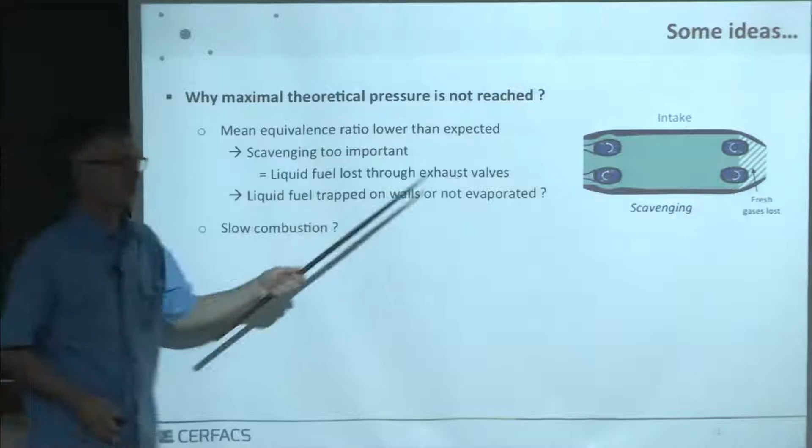You can also have other problems, like slow combustion. Maybe combustion goes too slowly, so when the outlet valves open, it's not finished, and you just push your gases away—so you lose efficiency. And I forgot one thing: of course, the heat transfer to the wall will also decrease the pressure.

One of the reasons two-stroke petrol engines were pushed out of the market was mainly this: the inlet port and the exhaust port were always in front of each other, thereby causing a lot of pollution.

The second question is, why do we have cyclic variations? Of course, it's a stratified flow in the chamber, and maybe at the place where you spark, you don't have fuel. It's just a bad idea.

The other problem, connected to what we have learned, is that this is a very turbulent flow. There's a very important difference between this flow and a piston engine. In a piston engine, when you close the valves, you still have a long compression phase during which the flow slows down and down until you get only a good small scale. You may have a big tumbling motion, but the velocities have gone down quite a lot. Here, it's not the case.

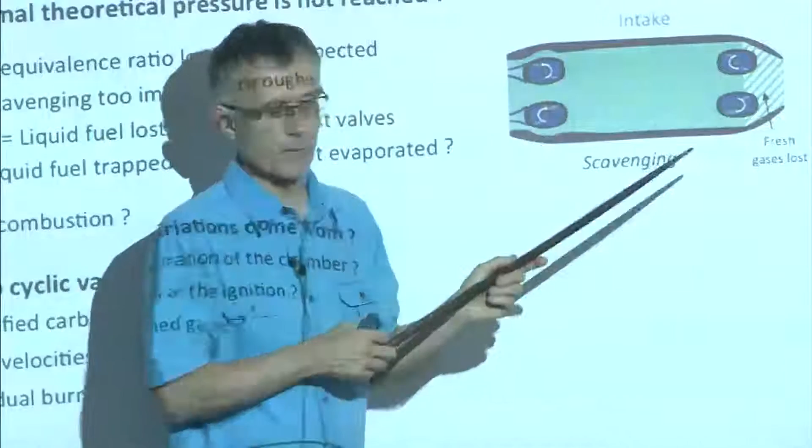There's another problem: in a system like this, you don't really know where the residuals are going to be. The residuals are the burnt gases of the previous cycle. They could stick somewhere and hide themselves so that they are still present in the following cycle, and thereby they will also decrease the efficiency because they cannot burn twice, obviously.

So here, what we did was try to do LES to address these questions. We're using again the same code - we have only one to do that, so it's always the same one. The difficulty in this case is that we need to handle the rotation, so I'm going to describe the methodology we use for that.

There are different methods to do moving meshes - I'm missing here the cut cell method of Converge, which we don't have in our code. There's this classical ALE, which was in Kiva 25 years ago, where you take the meshes and stretch them, and that's what we used for piston engines before. There's this method of immersed boundary conditions, where you have a fixed mesh, you put the objects there, and you block the zone where the object is. That's not very far from the cut cell method of Converge, actually.

And this MISCOG method, which is the one I'm using, is a chimera method, which I'm going to describe now. So what's the principle of the method we used? We did all kinds of tests with these methods, but the most suitable method here was MISCOG.

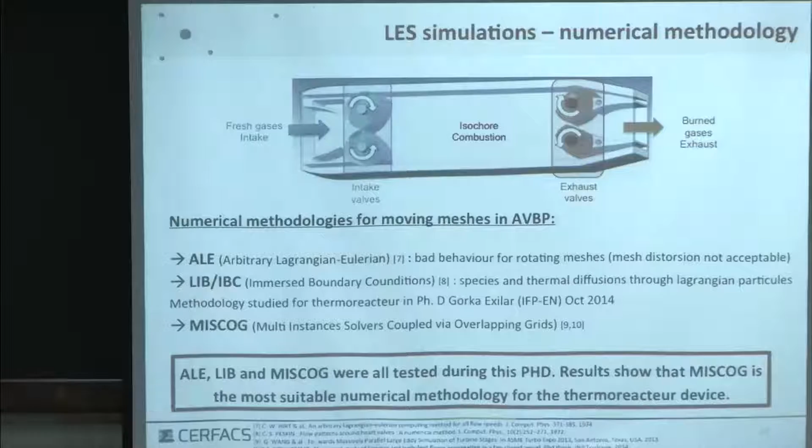MISCOG is a method where you actually use two AVBP solvers at the same time. One AVBP is running on the blue mesh, and another AVBP is running on the red mesh, and they have an overlap zone. In this overlapping zone, these two AVBP instances exchange information so that they can advance in time. So when this one needs to know the derivative, for example, he goes here and takes this one - we need to know the velocity here.

Okay, I get it from here. Same thing for this guy - he needs the velocity here, and he can take it from here. So the two meshes overlap a little bit.

The nice thing about it is that this one can turn and this one can be fixed. When you do the interpolation, this point will have moved later here - you just grab whatever data you find when you're turning. These two things are fixed in their own reference frame - you don't need to change the mesh. So that's a very elegant way of doing the problem.

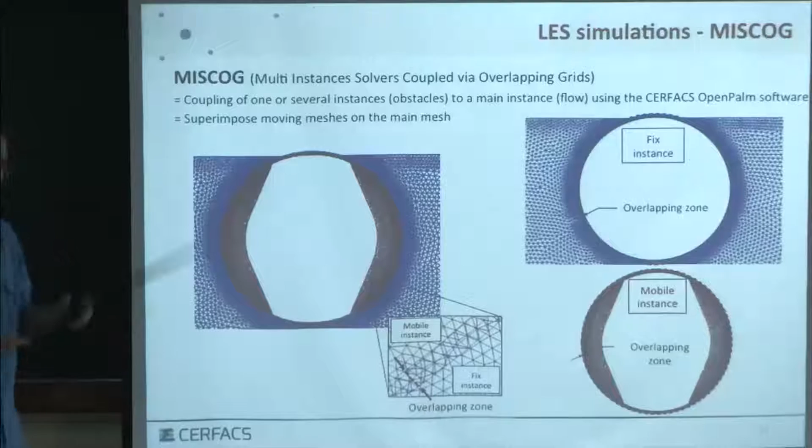And then, of course, to couple this, we have validated that for many other problems and academic cases. One of the problems is that in the experiments we know we have leaks, and then the question is: how do you mimic the leaks of the experiment in the simulation? That's a tough one. What we saw actually is that the method itself also has leaks.

So we were able to tune the leaks by changing this distance here. By tuning this distance, we were able to adjust the leaks of the numerical method to the leaks of the experiment.

In the leakage zone here, as you can see, you have the overlap of the two methods. You can tune here by adding a little bit of numerical viscosity to slow the flow, and that's the way we can mimic the leaks in the system.

So let me show you now the comparison between LES and experiment. We start with the cold flow.

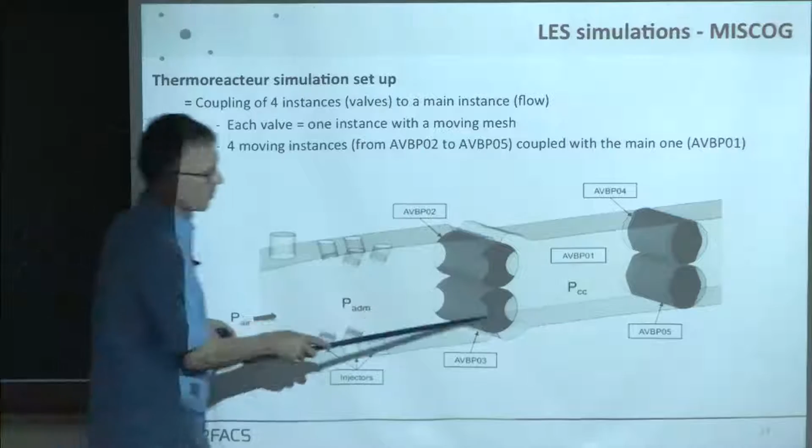Now, since we have 4 moving objects, we need 4 instances of AVBP running simultaneously, and then we have a 5th instance for the fixed part. And all of this is rotating at the same time.

Now, same problem for boundary conditions. This is the chamber. We compute the atmosphere, and we compute the tank here, so that we feel comfortable with the boundary conditions. Here, pressure is imposed, and here, pressure is imposed. So that's cool. No discussion about impedances, because they are included in the simulation.

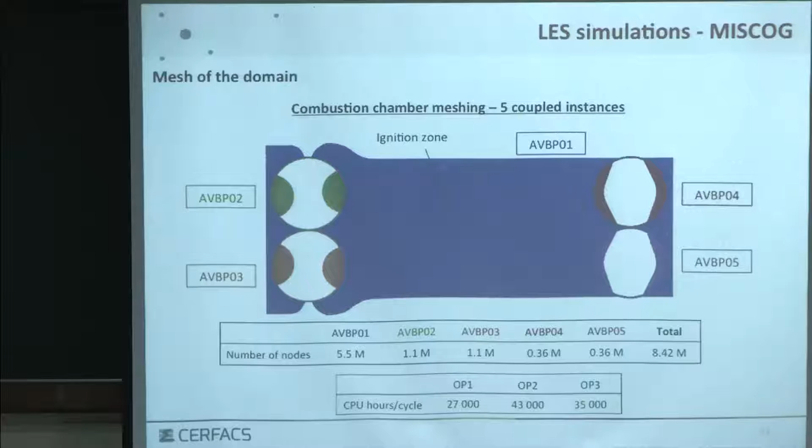We did not inject liquid fuel. We injected gas. In other words, we assumed that the vaporization was instantaneous. It was already complicated enough, so we said for the moment, let's just inject gas, and we inject octane in that case. Apart from that, we respect the timing of injection, 1, 2, 3, 4.

The combustion model is always the thickened flame model, we don't change. This is the kinetic scheme - you've seen that many times now. You recognize the octane scheme for 2-step, which is good for the lean flames, not so good for the very rich flames, but still it's quite reasonable.

You don't need more at this point. We are not at the point where we want to compute NOx for this case. We have a spark, so we model it again with this ED model where we deposit energy at one point over a certain time, and that will trigger the combustion.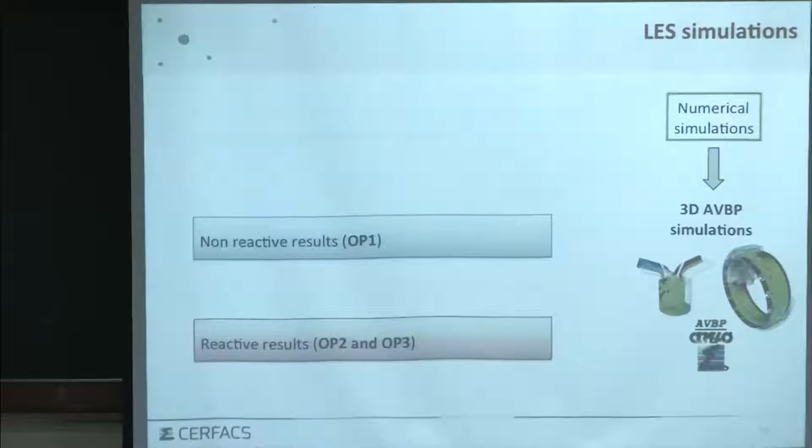So let's look now at these different cases. The first one is a non-reactive case at 1200. Then we go to 1200 with combustion, and then 1500 with combustion.

Absolutely. And what we say is that vaporization is instantaneous, which is not true. And we know that actually the worst problem is this one. We should take that into account, but for the moment, we didn't do it.

Because you showed us some sooting flames - yeah, and that's probably the reason, that could be due to the two-phase flow. Actually, it's worse than that. We believe you have films, liquid films of fuel sticking to the walls, and that's another problem.

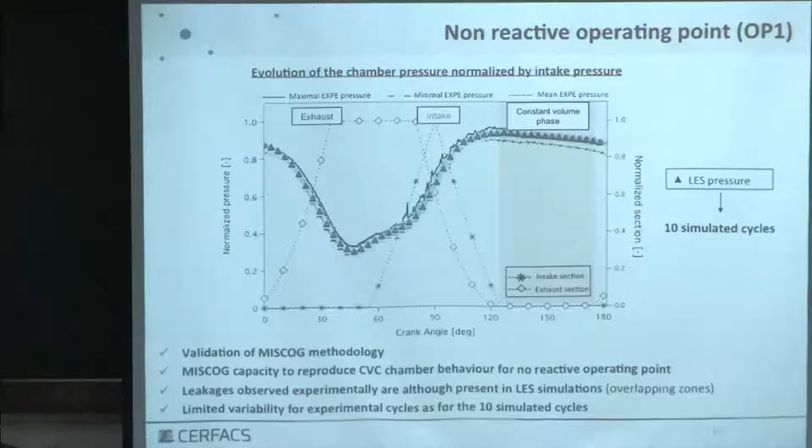How did we do that? Well, we just tuned the size of the mesh, which is here, up until the point we got the same kind of losses. That's a big problem, I guess. In practice, modeling this kind of losses is tough. So in that case, it was easy, but I'm afraid it will be a problem later.

So where do cyclic variations come from now if you go to combustion? Now this is a field of axial velocity starting when the valves are open here at the inlet, and they're still open at the outlet. So if you look at that and you look at the movie here...

Okay, so you see what you mentioned before. There is backflow first, it's going the wrong way, and then there's an inflow. Backflow, now they open, you have an inflow, you still have something going out, then you close. Then you have the flame starting.

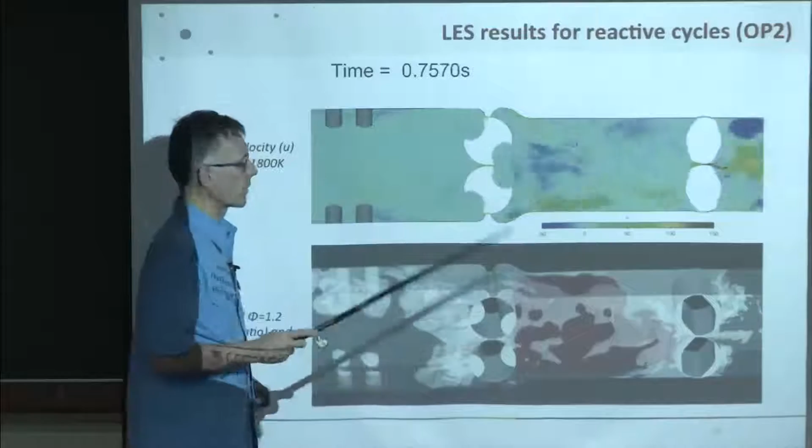It goes fast. This is how you see that you have to be fast for combustion. So the flame reaches the walls fast, so you have a very strong flame-wall interaction. Then you open the exhaust, you have a fast jet here with a shock actually at the outlet, and then you feed it again from the inlet.

So you can watch this for a while. Initially, there were problems even in the experiment because the flame would flash back here. Here it does not do it because the timing is such that there is no flashback, but with this big jet, there could be actually.

And here at the bottom, you have the isosurface of fuel in white and the isosurface of temperature in red, and the message is about the same. You can see now the fuel injection. Now the flame begins, it's getting out, and then you start again.

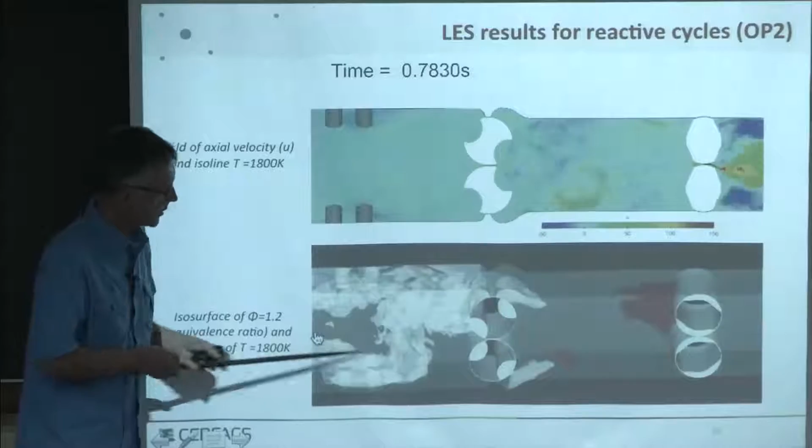You can see that the fuel mass fraction field is not that great. I mean, because you inject one after the other here, you start by the top, then the bottom. These things are moving in all directions because they are strong acoustic waves. So really, it's not a really clean flow field in which you have to ignite your flame.

Okay, so if you look now at the curves, this is what we found. Ignition is here. This is the experiment. In the experiment, that's the mean pressure, the max pressure, and the lowest pressure.

So when you do the LES, this is one cycle of LES. This is another one. This is another one, and you keep doing cycles. Some of them are really bad. This guy does not ignite at all. Some of them are reasonably good, and you see, they are all over the place here, but they are not very far from the experiment.

What they show also is that the dispersion is very large. None of these cycles look the same, okay? So again, we have a lot of CCV here. Following what we did for engines, we knew that 25 cycles was a good guess to start looking at cycle-to-cycle variations. So the LES is in the experimental envelope, and like the experiment, we found very important cycle-to-cycle variations.

This is two-step chemistry. Two-step. So where do these things come from?

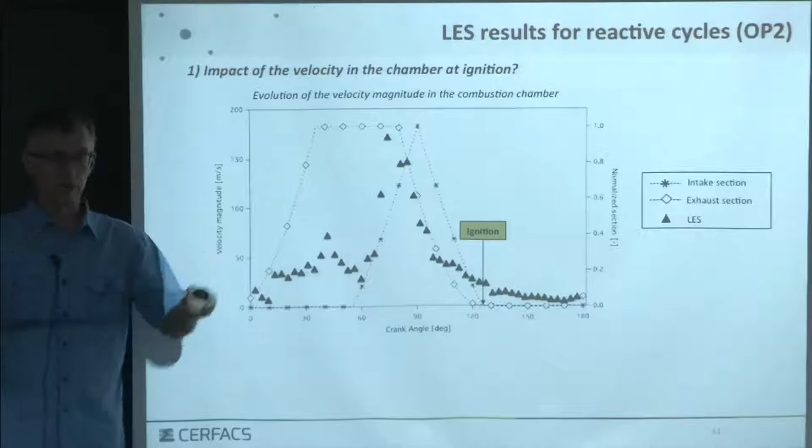One of the things we did is to look at the velocity magnitude in the chamber. From one cycle to other cycle, we just integrated the velocity field, the modulus, and we plot it here. So this is for one cycle. You see that when you open the inlet valve, you have a fast jet entering your system. Then when you close it, it decays. And when it finishes decaying here, then we ignite.

This is one cycle, this is another one, and you plot all the cycles, you find out that at the moment where you spark, the velocity can go anywhere from 10 to 50 meters per second on average. In other words, in certain cases you ignite in a quiet flow, in other cases you ignite in a strongly turbulent flow. And that's, we believe, one of the sources of the problem in terms of cycle-to-cycle variation.

But remember, we cannot wait because we don't have that much time before we go to the next cycle. So what we started doing is to plot here the number of the cycles and here the maximum pressure, normalized by the inlet pressure. So when you see 1, it's a cycle which did not burn. When you see 3 or 4, it's a cycle which burned. And you see this pattern here that it seems very difficult to have a lot of cycles which burn.

And for the LES here, we had this kind of pattern. We saw that we could separate cycles in two, cycles which burn and cycles which don't burn. And there are many cycles which don't burn. The experiment says the same thing.

So there we have a big problem. Why do they burn? When we put the spark here, this is the spark location, and look at the velocity field, we see that for the non-burning cycles, we have on average a very large velocity at the spark. Again, it comes back to this idea that if you have a strong motion in this flow, it's a bad idea to ignite it because it can lead to quenching.

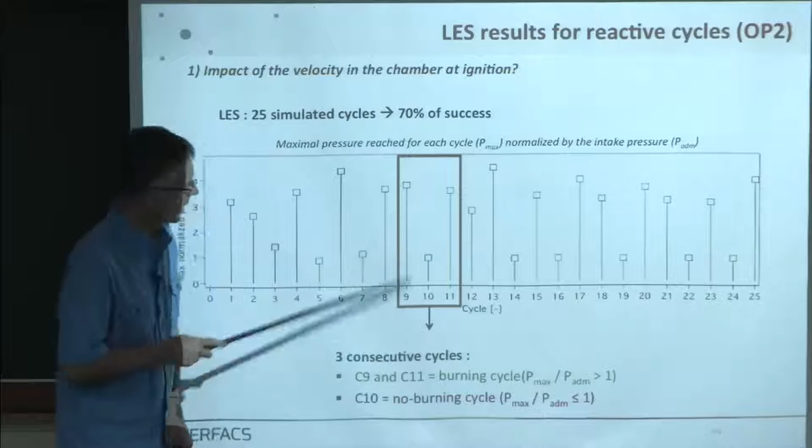Now, going back to these cycles, I will isolate 3 of them, C9, C10, and C11, and show you things during the cycle. You see here the pressure curve. That's a good cycle: pressure goes up, good combustion. Then pressure goes down. Next cycle, no combustion at all. Next cycle, it goes up again. So it seems that certain cycles are completely misfires.

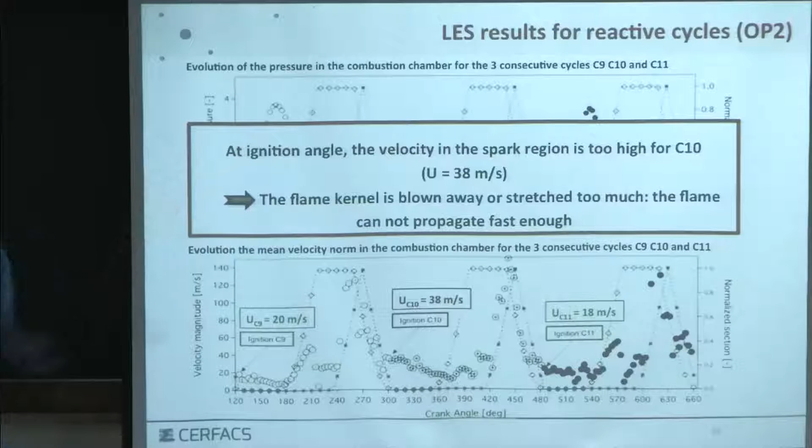Now, if you look at the velocity in the combustion chamber for these cycles, you see that for the cycles which burnt well, we had a low velocity, and when the cycles quench, you have a large velocity. That seems to be almost a reproducible pattern: if you have a large velocity, you quench this flame. Why? Because if the velocity is of the order of 30 meters per second, and the flame speed is 30 centimeters per second, the flame will have a hard time, and it will be completely destroyed by turbulence.

So we looked at the impact of the velocity. You can see here different movies. That's the first one, for C9. For C9, combustion is extremely good and fast, but the flow velocity is less. Here, the flow velocity is small. We ignite in a flow where the velocity is not too much, and that helps to keep our pressure curve correct and to go fast.

So let's go to the next example, which is C10. This one does not work the same way. Now you see that when we're going to ignite, we ignite in a very strongly turbulent flow. You can see here the velocity. At the moment we ignite, nothing's happening. You have a very small kernel that you saw here. You're going to see it again, but it doesn't last, and the flame is quenched right away. Ignition is now. So you saw it, and then it went away.

And for the last cycle, it's a little bit better, just a little bit slower too. So here we ignite, and the kernel will develop. You see it here. We see it's more convected, but still it's able to complete combustion. So you see that there seems to be a link between the initial velocity field and turbulence.

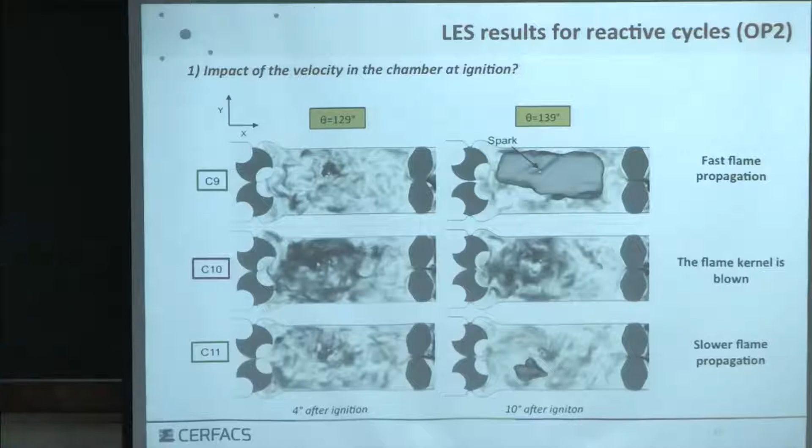Let me show you that. But before that, let me also show the influence of residual gases. If you have residual gases in the chamber from the previous cycle, you will have a low pressure. In other words, C10, for example, has a lot of burnt gases there. It will have a low efficiency.

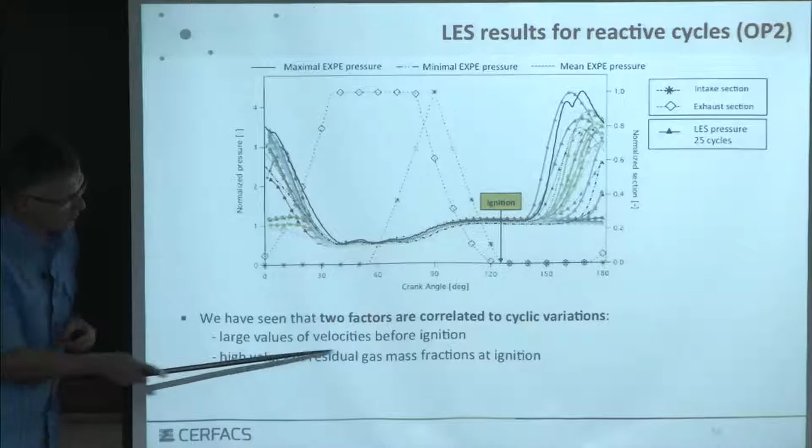At that point where we did this study, we realized we had a problem. We had two sources which could explain CCVs. One of them was that you have large values of velocity, which is bad for combustion. The other one is that if you have high values of residual gases, it's also bad. So which one is the source of CCV? There's one way to find out.

If you look at the velocity, you can check this. Basically, if you have a low velocity at one cycle, you get a high pressure at the next one, and vice versa. You can plot a diagram where you put the velocity at the beginning of the cycle against the pressure. You see that for all cycles where the velocity is more than 33 meters per second, you're sure you're going to have quenching. That seems to be the most important parameter here. Cycle n-1 controls cycle n, because if you give cycle n a large velocity, it will quench.

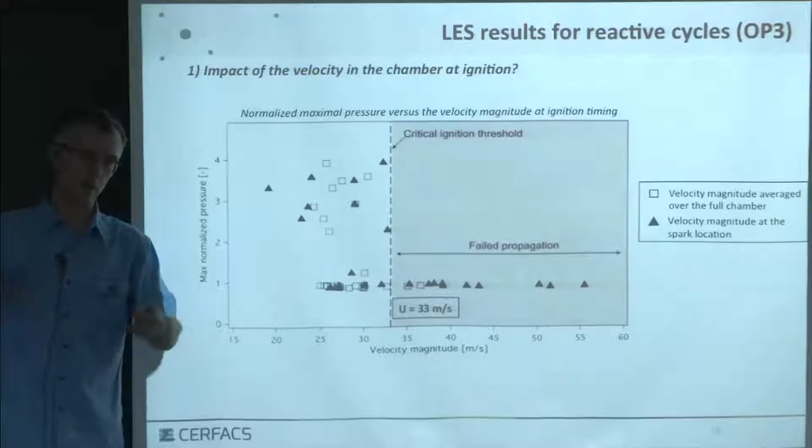That's very different from engines, because in a piston engine, due to the compression phase, by the time you spark you have forgotten the previous cycle - you have intake, compression, everything's gone, you have a long time. Here it's not the case. Each cycle remembers what happened before.

In other words, that explains also why cycles are very difficult to keep in the stable region. If you have a good cycle, it's very likely that the next one will not be good. This is why we see this continuous oscillation. The reason is that a good cycle induces large velocities for the following cycle, which then becomes bad.

To conclude on this problem, it really tells you that it's a good idea to do constant volume combustion chambers, but it's not going to be that simple. It took 100 years to do piston engines - they're not going to do it in 2 days. One of the first problems they will have is cyclic variations. They will have leaks, as we've seen already. And of course the efficiency at the moment is not 30% more than before, it's like 50% less. So it will take a long time to make progress there.

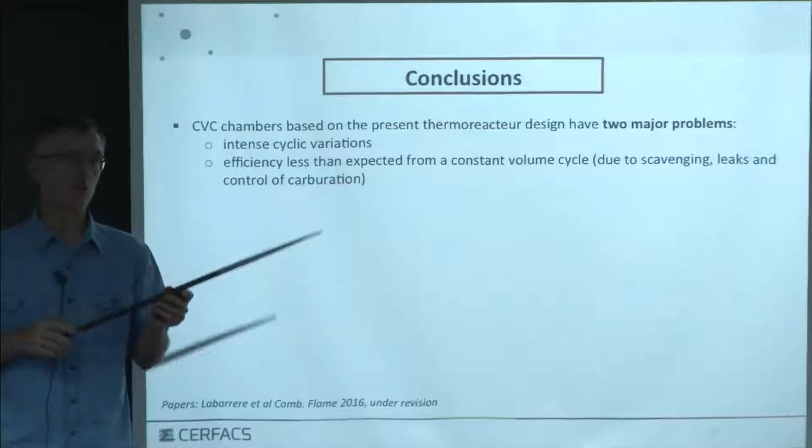What was the shaft power intended to be taken out finally from the chamber? Was it a turbine, or was it driving something? For the moment, this system should still be included in a gas turbine with a compressor and a turbine. So the 3 bars or more will be provided by the compressor. Is that the question you asked?

Yeah, because efficiency very much depends on that. Sure - no, that was a laboratory system. Of course, in a real system, instead of 3 bars you would have 30. But still, if it does not work for 3 bars, it's not going to work for 30.

Now, we showed that you can investigate this with LES, and that's probably a good idea to do before building a new one. We've seen that the LES allows us to explain what we see in the experiment.

These unstable mechanisms are different from real engines, because in IC engines we had perturbations which are not due to coupling between cycles. In the future, they're going to change that completely - they have a new design here. They didn't give up; there's a big project to try to do better. And it's actually a complicated problem.

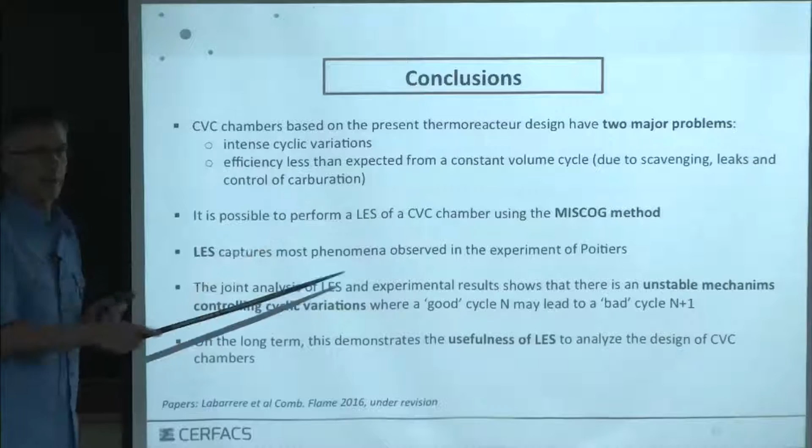One additional problem for those who know turbines is that if this system works, the turbine will be fed by an unsteady flow field. You know the turbine is not really designed for that, because the flow rate is going from 0 to 1, and the turbine will have problems. So probably we'll have to compute the chamber and the turbine at the same time if you want to do that in a clean way.